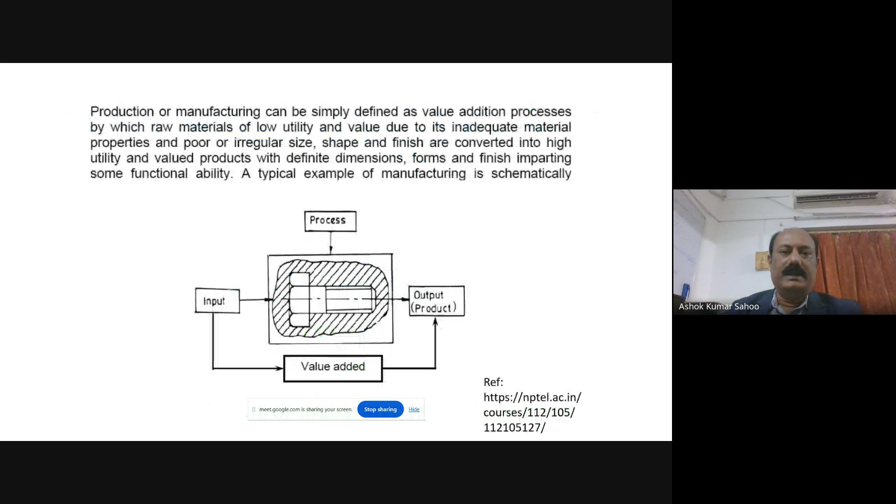So let me go through the details. As you know, manufacturing is simply defined as a value addition process, a conversion of a raw material of improper size and shape into a high utility and high value product. That means it adds value to the manufacturing process. In general, manufacturing is a value addition process where the material undergoes several manufacturing process cycles, starting with the raw material.

It has to be preformed first, through different manufacturing processes like casting, forging, rolling, extrusion, etc., to get the near net shape product, which is called preforming. As you know, the preformed part does not give the required dimensional accuracy or surface quality, and as such does not serve any purpose for engineering applications.

That's why it needs to be finished, and this semi-finishing operation is normally done by the process called machining. And if you want to enhance properties of the work material like hardness, wear resistance, corrosion resistance, etc., it needs to be heat treated.

Then after heat treatment, the material again needs to be finished by machining. After that, it undergoes a super finishing process by lapping and honing. So it has a long manufacturing cycle and costly set of equipment, and inspection has to be carried out at each and every stage. So machining is an essential and common manufacturing process for semi-finishing and finishing the preformed part.

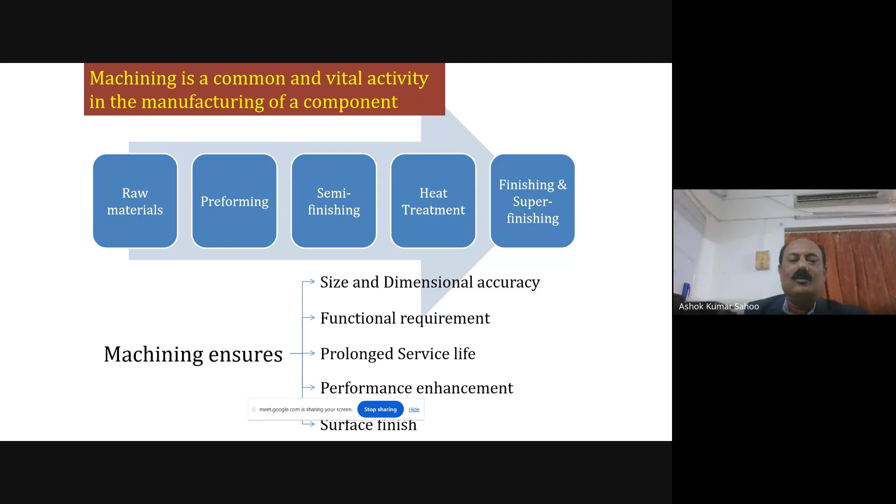What does it ensure? It gives the required size and dimensional accuracy, satisfies function, prolongs service life, improves performance, and ensures surface quality. As such, the preformed parts need to be finished by the process called machining to get a high quality, high utility, and high valued product.

Machining is an essential and common engineering process of semi-finishing and finishing the preformed blank to desired shape and size with good surface quality, by removing the extra material in the form of chips with the help of a cutting tool that moves past the workpiece in a machine tool environment.

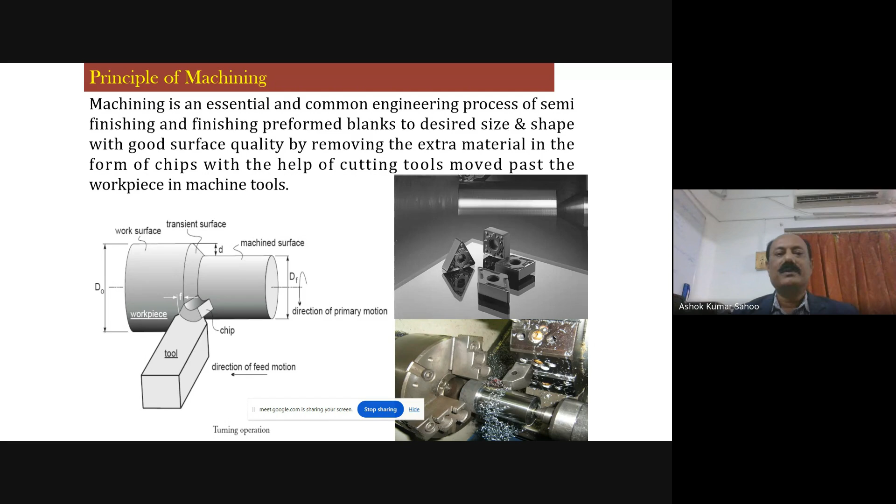It is performed with several cutting tools: a single point cutting tool, a double point cutting tool like a drill bit, or a multi-point cutting tool like milling cutters. Geometrically, if it is a single point cutting tool, the mechanism of chip formation, particularly at the tool-tip point, is more or less the same whether it is single point, double point, or multi-point.

The cutting tool plays a very vital role in machining and machinability studies for any work-tool combination pair. So we have to discuss the salient features of the different cutting tools especially used in manufacturing.

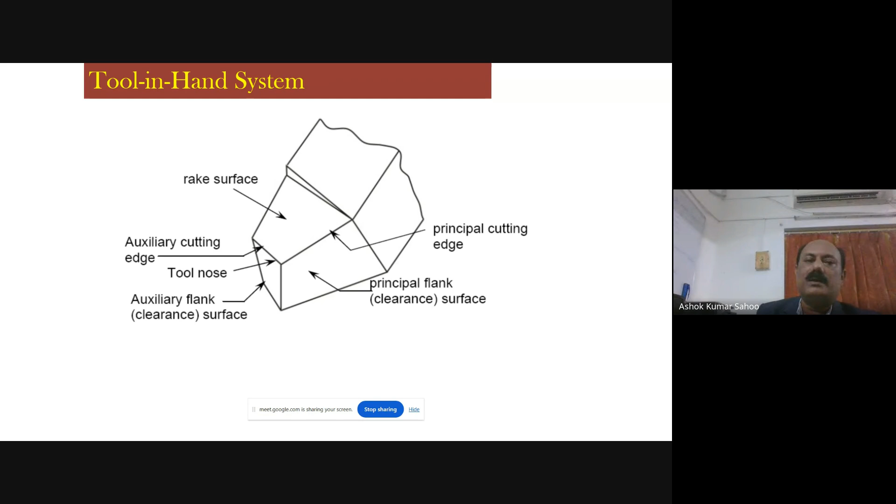Whether it is a positive rake tool or a negative rake tool, the tool is designated in different systems of reference. One is the tool-in-hand system, which gives only the salient features of the cutting tool like rake angle, clearance angle, principal cutting edge angle, auxiliary cutting edge angle, and nose radius.

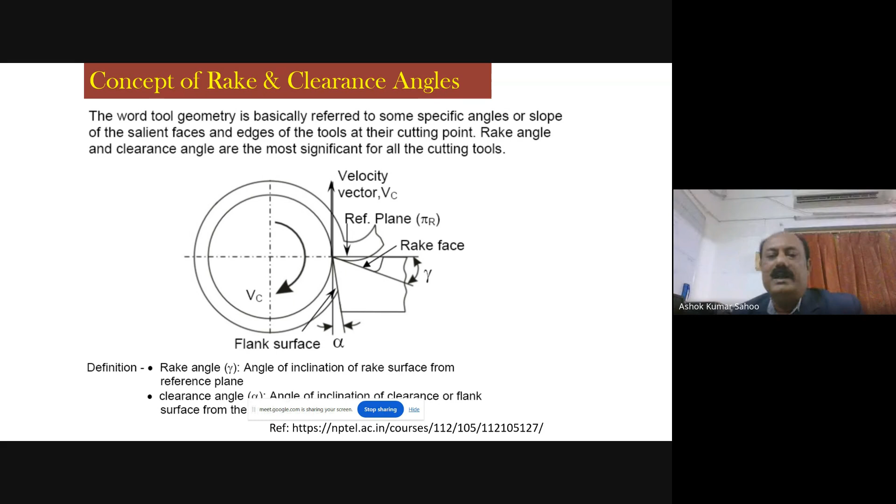The two most important angles that play a vital role in machining are the rake angle and the clearance angle. The rake angle is essentially provided to allow the chip to flow in a convenient direction, and the clearance angle is provided to avoid rubbing between the work-tool interfaces.

There are several geometries: positive rake tool, negative rake tool, or zero rake tool geometry. The clearance angle is essentially provided to avoid rubbing.

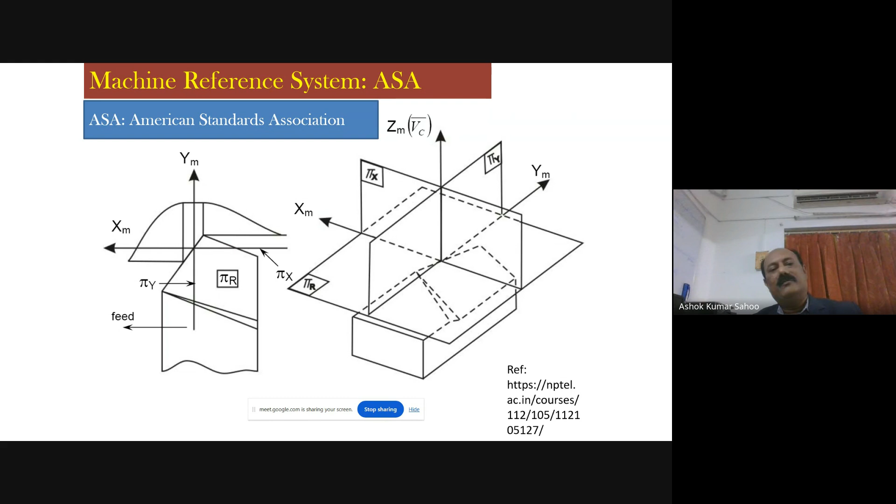The tool is designated in different systems like the American Standards Association (ASA) system, also called the machine reference system or XYZ reference system, where you get different angles in different views: the machine longitudinal view, the machine transverse plane view, and the reference plane.

There are three planes: reference plane, longitudinal plane, and transverse plane, designated by the pi-r, pi-x, and pi-y planes, and the x-m, y-m, z-m axes.

There are 7 angles associated with the different planes: gamma-y, gamma-x, alpha-y, alpha-x, phi, and so on. These are the tool nomenclature designated in the ASA system.

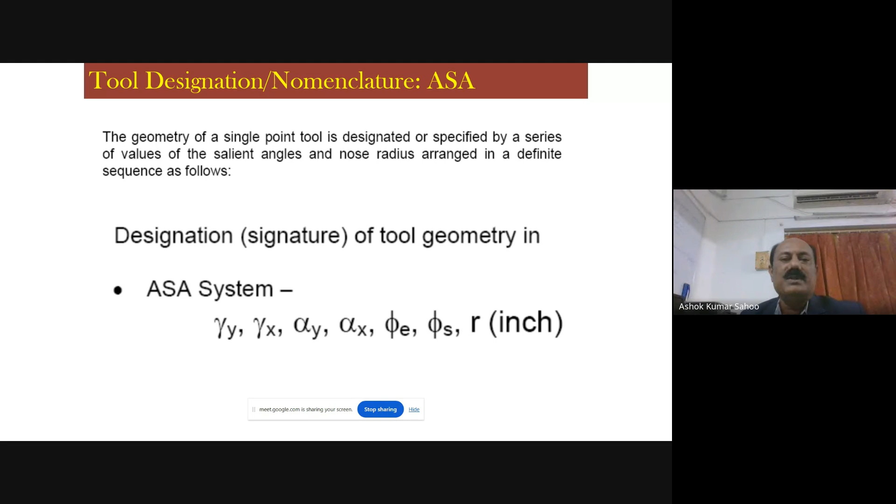Similarly, the tool is also expressed in the ORS, orthogonal rake system, in 3 different planes. One is the reference plane, then the orthogonal plane, then the principal cutting plane, which is along the direction of the principal cutting edge, and the orthogonal plane is perpendicular to both planes.

The tool geometry is designated in the orthogonal rake system where you get different angles in different planes. In the principal cutting plane, you get the inclination angle. In the orthogonal plane, you get the orthogonal rake angle and orthogonal clearance angle.

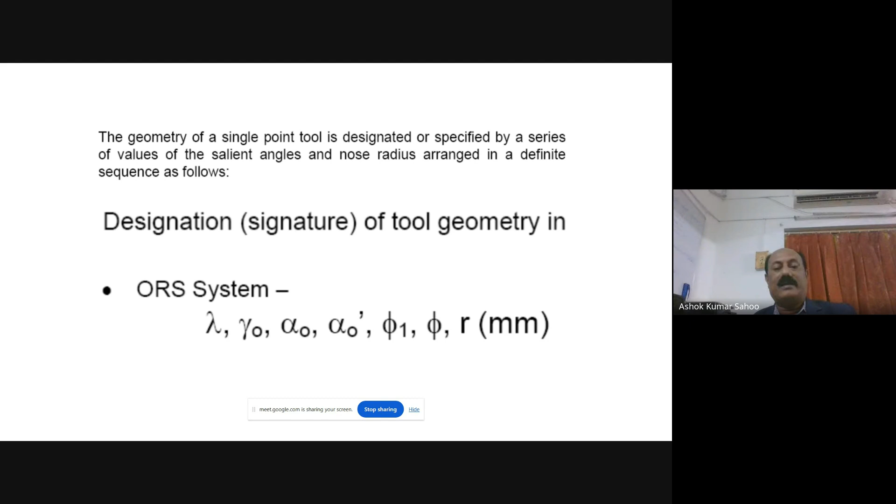If you cut the view of the auxiliary orthogonal plane, you get another clearance angle called the auxiliary orthogonal clearance angle. The tool is designated in the ORS system with angles lambda (inclination angle), gamma-O (orthogonal rake angle), orthogonal clearance angle, and auxiliary orthogonal clearance angle, along with auxiliary cutting edge angle, principal cutting edge angle, and nose radius expressed in mm.

Similarly, the tool is also expressed in the NRS system, normal reference system. Again, 7 angles are associated with it: lambda, gamma-n, alpha-n prime, and so on. These are associated with the normal plane, which is the plane normal to the principal cutting edge, different from the orthogonal plane.

This is the geometry and mechanism of chip formation. We know the cutting tool is subjected to compression first at the tool tip point. During compression, shear stress develops, and whenever the magnitude of shear stress exceeds the strength of the work material, deformation takes place and it flows along as chips.

The chip formation starts as yielding takes place at the chip-tool interface, called the shear zone or primary deformation zone, where the work is converted into heat, and a tremendous amount of heat is generated at the primary deformation zone.

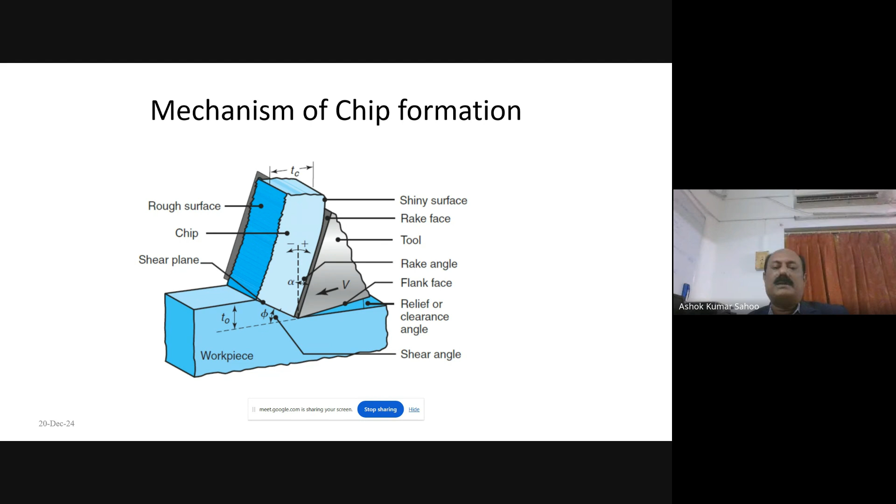When the chip flows over the rake surface, due to friction at the rubbing chip-tool interface, there is another secondary deformation zone where heat is generated. So total heat generation at the tool tip point occurs in the primary deformation zone, secondary deformation zone, and tertiary deformation zone. This needs to be controlled by applying proper cooling and lubrication techniques.

This is done under different sustainable machining environments like dry machining, minimum quantity lubrication machining, nano-assisted machining, or flood machining. You have to control the temperature at the tool tip point by applying various coolants.

Machining and machinability refer to the ease of machining, and this ease of machining is usually assessed and judged by the magnitude of the cutting force, the tool life, the surface finish, the magnitude of cutting temperature, and the nature and form of the chip being formed.

Machinability is considerably high when the cutting force, temperature, surface roughness, and tool wear are very low, tool life is high, and the chips are short and continuous, providing short chip-tool contact length and less friction. If we observe this phenomenon, we can say the machinability is good.

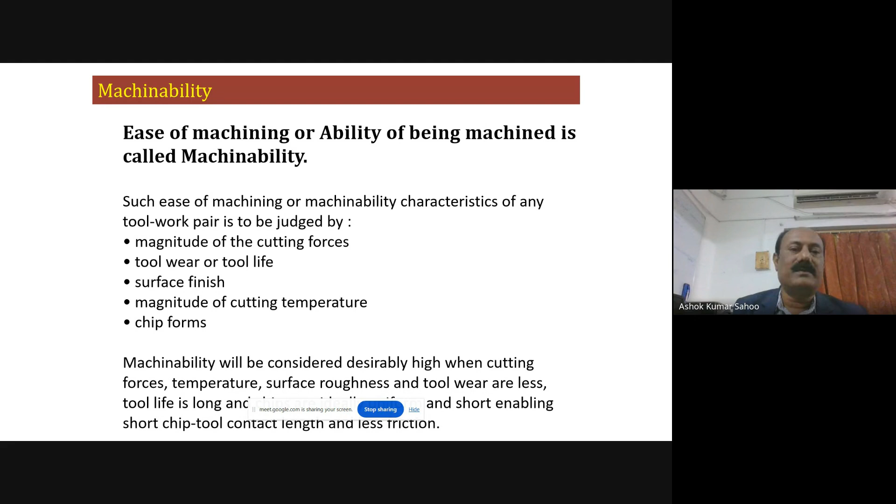The cutting tool is usually failed by catastrophic failure, through different modes: mechanical breakage due to excessive force, stress and vibration, or plastic deformation due to stress and cutting temperature. If these two failures are avoided, due to advanced cutting tool materials, another form of wear occurs which is inevitable and cannot be controlled.

There are many forms and types of wear that occur at the cutting tool tip point during machining. One is flank wear, and another is crater wear. As observed, these are the patterns of wear seen at the flank tool rubbing interface zone, and also where the chip flows over the rake surface.

There is crater wear formation due to adhesion and diffusion mechanisms, and also very small contact between the auxiliary cutting edge point and the work surface, resulting in auxiliary flank wear.

But out of all these wear phenomena, the most important are flank wear and crater wear, which are formed due to adhesion, abrasion, and diffusion mechanisms in particular.

As shown in the diagram during the machining operation, wear mechanisms occur due to abrasion, chipping, adhesion, crater wear, and flank wear VB. The recommended limit of flank wear is 0 to 0.3 mm as per ISO standard for acceptable limit, and for roughing operations it may go up to 0.6 mm.

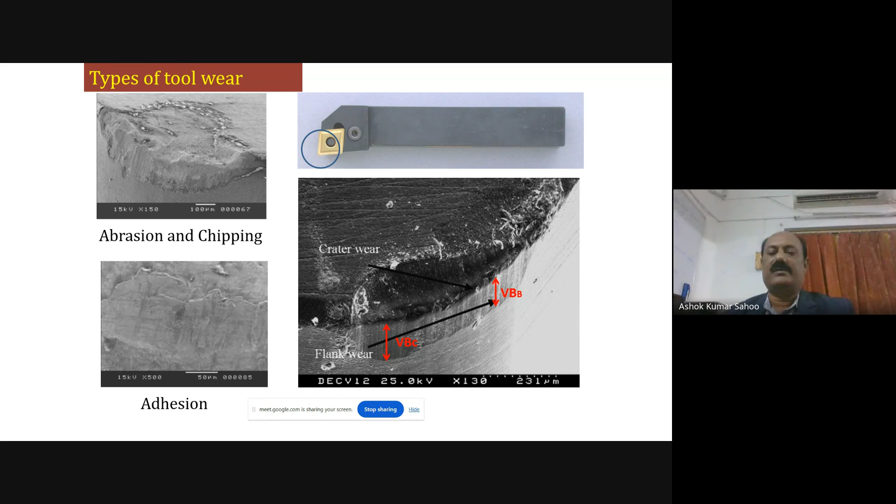In order to have good properties of the cutting tool material to reduce wear, the cutting tool should have high strength, hot strength, and abrasion resistance, high hardness to resist abrasive wear, high hot hardness property, high fatigue resistance, and resistance to adhesion and abrasion. It should have low thermal expansion coefficient, with thermal conductivity high at the core and low at the surface, and chemical stability. These are some essential properties the cutting tool media should possess to avoid tool wear.

Nowadays, a commonly used cutting tool material in machining operations is the carbide cutting tool material. Coated carbide tools are extensively used in machining difficult-to-cut materials, or in hard machining. These coatings are usually applied at the substrate of the carbide interface.

These hard thin layer coatings are nothing but titanium nitride, titanium carbide, titanium carbonitride, and aluminum oxide. These coatings are provided in the range of 2 to 15 microns of thickness to the cutting tool, by means of physical vapor deposition and chemical vapor deposition techniques.

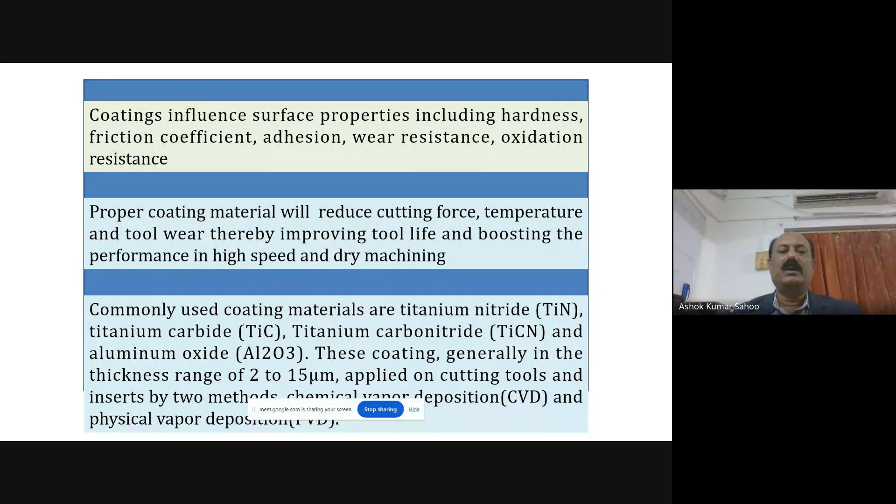I'm showing one case study comparing the performance of uncoated and coated carbide inserts during machining of the hard material D2 steel, which is used in the machining operation.

Let us see the actual machining and machinability observations and the cutting conditions used. The workpiece used is D2 steel with a hardness of 22 HRC. Cutting speed is comparatively high at 200 meters per minute, feed rate is 0.21 mm per revolution, and depth of cut is 0.4 mm. The cutting operation is conducted under dry environment with two inserts: uncoated carbide and coated carbide inserts.

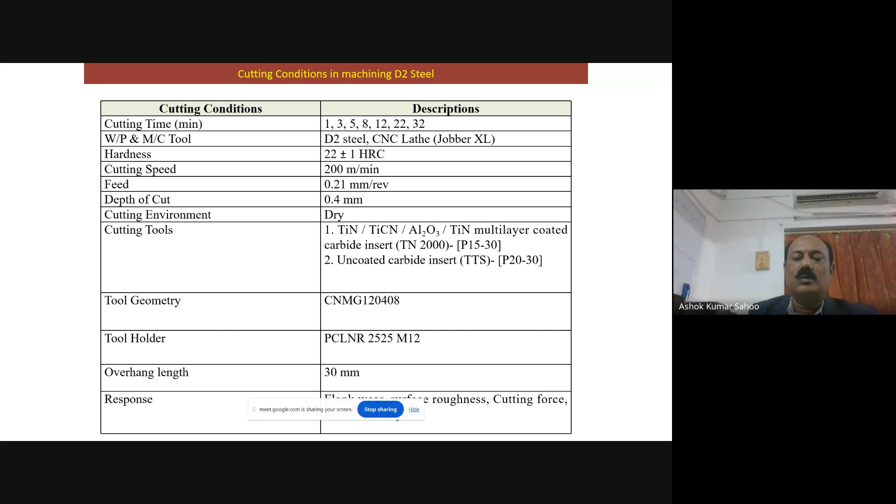As we have observed, during 5 minutes and 3 minutes of time, the uncoated carbide fails and rapid tool failure occurs during 5 minutes of time, whereas the coated carbide insert undergoes up to 32 minutes of operation before attaining the required flank wear limit of 0.3 mm, or to achieve the higher tool life.

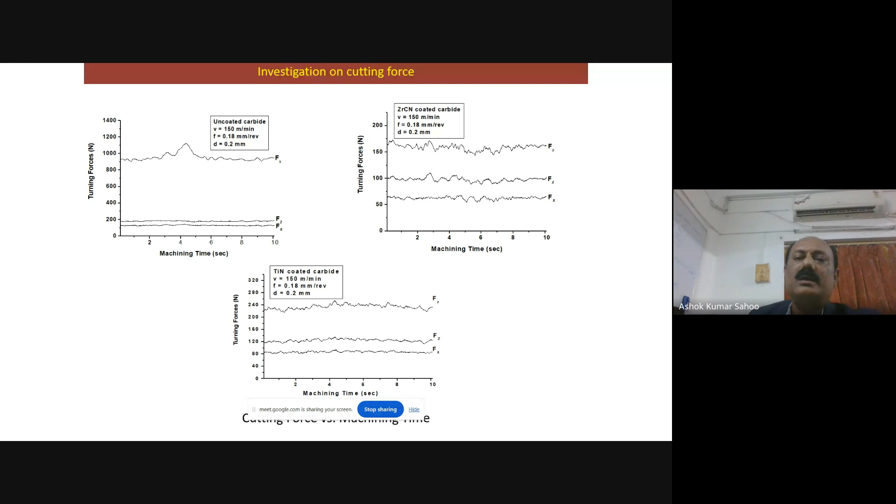That's why the life of the cutting tool for the coated carbide insert is usually higher as compared to the uncoated carbide insert. So in order to compare the performance of the two inserts, economic analysis has also been calculated.

For the comparative economic analysis, as per Gilbert's approach, there are different cost components associated with the economic analysis: the machining cost, the tool changing cost, and the tooling cost. The addition of the machining cost, tool changing cost, and tooling cost is called the total machining cost per part.

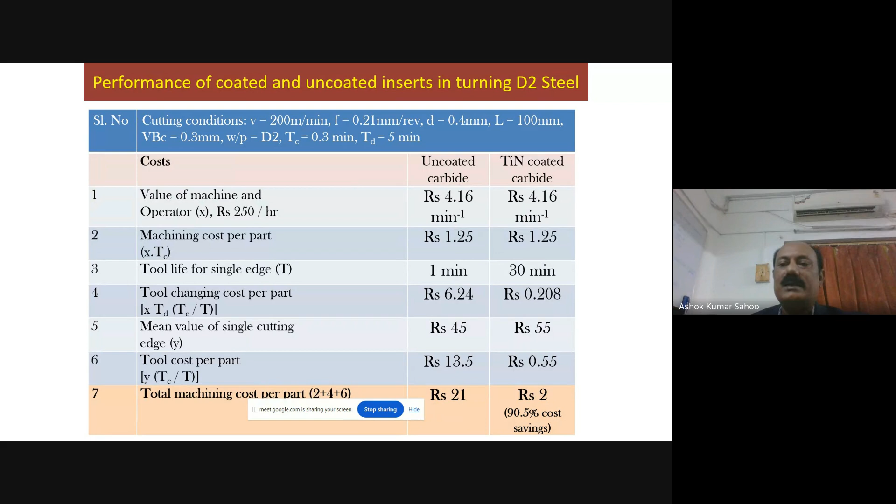As observed, the total machining cost per part for the titanium nitride coated carbide insert is only ₹2, as compared to the uncoated carbide insert, which induces 90.5% cost saving by utilizing the coated carbide insert in the machining of the hardened die steel operation.

So in conclusion of this case study, we observed that the uncoated carbide insert induces severe chipping, higher cutting forces, quick dulling of the cutting edges, and very low tool life, as compared to the titanium nitride coated carbide insert, which induces higher surface quality, less cutting force, and steady flank wear progression.

To achieve the tool life, so that tool life is higher, and 90% cost saving - this is the benefit of utilizing the coated carbide insert, so as to get higher machinability and higher tool life and less cost during machining of the hardened steel.

So this paper has been published in the journal Measurement, Elsevier.

Let us come to another case study of hard machining. Nowadays, it is an emerging technology in the machining industries, or manufacturing industry particularly, because grinding was the preferred choice for machining hardened components earlier. But due to the advent of super hard cutting tool material and also rigid machine tools, the hard machining operation is successfully replacing the traditional grinding operation.

As we know, in the traditional grinding operation, it has a longer manufacturing process cycle, costly support equipment, and also costly grinding wheel cost. Cutting fluids are added during the grinding operation, so it is not an environmentally friendly operation.

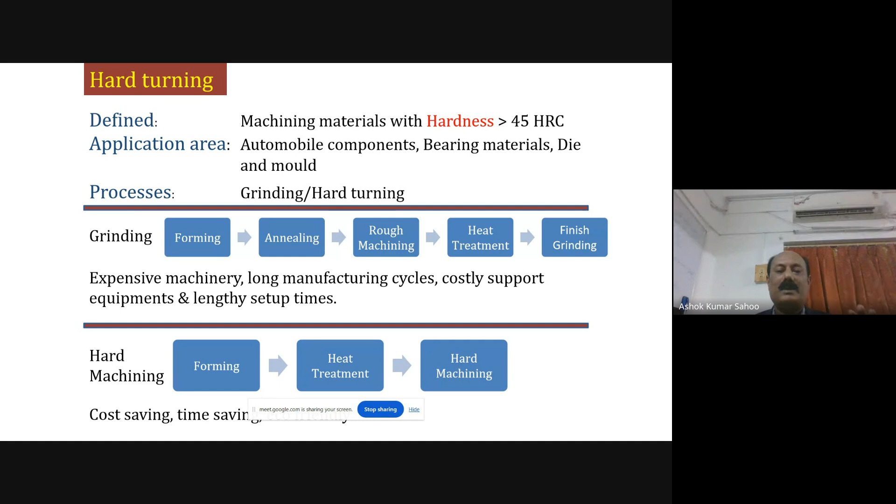But due to the application of hard machining, it reduces the manufacturing cycle, reduces the cost, and is operated under a dry environment. So it is cost saving, time saving, and environmentally benign manufacturing.

Nowadays, hard machining is successfully replacing the grinding operation in many situations for engineering applications, particularly in automobile components, bearing material, and die and mold industries. That's why hard turning is now emerging as a research topic in manufacturing fields.

It has a lot of advantages: substantial reduction of manufacturing cost by reducing the cycle of manufacturing, decreases machining time, improves surface quality, and eliminates the coolant operation, which is the most important part extensively utilized in grinding operation.

Hard machining eliminates the long manufacturing cycle, and preferably the cutting tool material used is cubic boron nitride CBN or ceramic tools, which are popularly used. But nowadays the manufacturing cost has been reduced for hard machining by utilizing coated carbide cutting inserts, because their cost is comparatively less than CBN and ceramic inserts. However, we have to analyze the machinability aspects of coated carbide inserts to ensure suitability in hard machining.

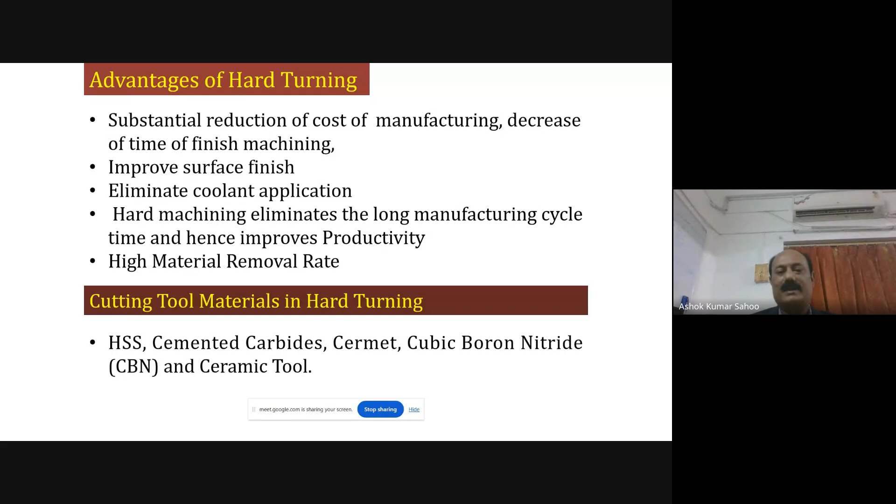There are a lot of industrial applications in hard turning operation, such as transmission shafts, axles, ball roller bearings, crank pins, and engine components.

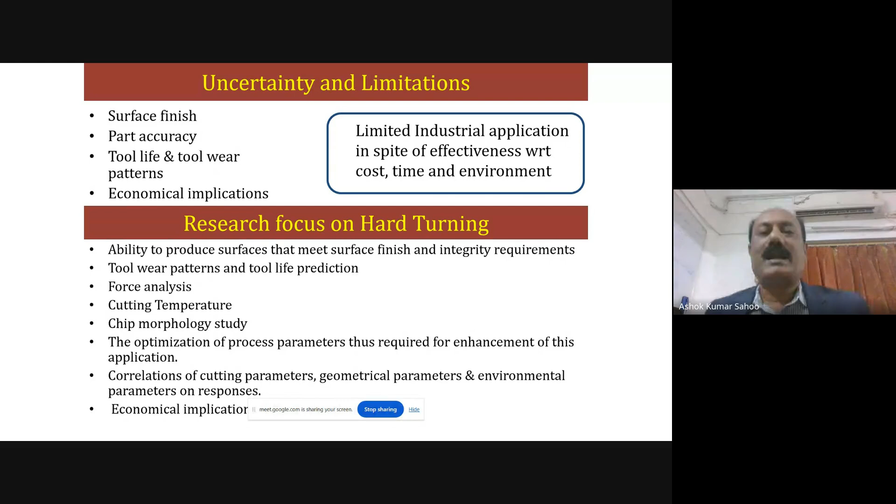Some comparative features between hard machining and grinding show qualitative comparisons. But though hard machining has a lot of advantages compared to grinding, there is always an uncertainty from an industrial application point of view, despite its effectiveness with respect to cost, time, and environment.

So that's why, to get the surface finish comparable to the grinding operation, questions remain about part or dimensional accuracy, what will be the tool life and tool wear in hard machining particularly using low cost coated carbide inserts, and what will be the economical implications. These are certain uncertainties always present in hard machining operation.

That's why research is needed, focused particularly on hard machining or smart machining, on surface finish and integrity, tool wear pattern and tool life, force analysis, cutting temperature, and chip analysis.

Optimization of the process parameters is highly essential for the effectiveness of hard machining. We have to correlate different mathematical and prediction models to be developed, along with economical implications. So there are a lot of research gaps in hard machining.

That's why it is a burning topic now in manufacturing research, particularly in sustainable manufacturing and smart manufacturing, so as to get the benefit of it. The most popular coated carbide inserts are less investigated in hard machining, which is one of the knowledge or research gaps we have observed.

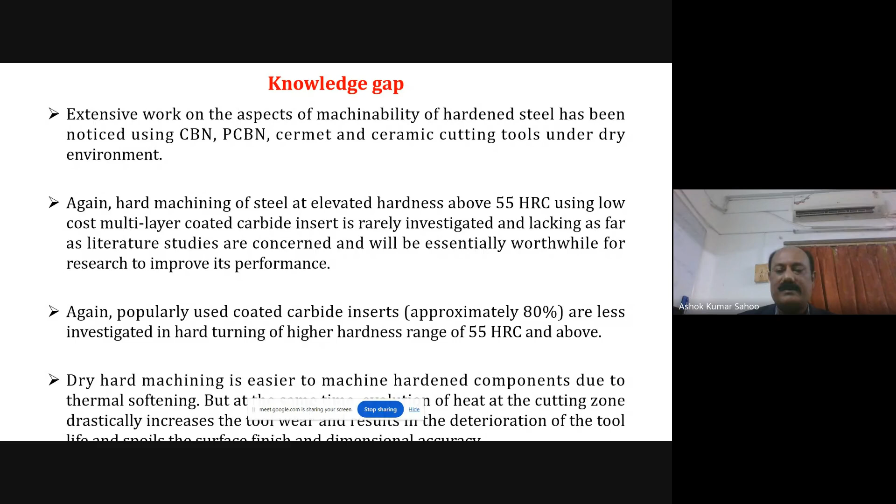Dry machining is suitable for machining hardened components due to thermal softening, because the force is reduced. But at the same time, it increases tool wear because of the generation of a lot of temperature, due to which tool wear is maximum and higher, which drastically reduces the tool life and also the surface quality. These are the challenges.

That's why a detailed machinability study on surface finish, surface integrity, tool wear, and tool life needs to be carried out using coated carbide inserts, which are less expensive cutting tools, and it should be implemented in hard machining for its effectiveness.

The majority of hard machining operations are undergone in a dry environment, and few studies were undertaken on the application of coolant. So there is agreement and disagreement on whether we will apply coolants in hard machining operation or not. This is also a burning topic, open to the researcher's point of view.

Second thing, coolant is usually not suitable in hard machining operation, because if you apply coolants, a lot of temperature is generated. If you apply coolants in flood machining operation, it induces thermal stress, and it may cause catastrophic failure of the cutting tool. That's why there is frequent failure of the cutting tool during the application of coolant due to thermal stress and catastrophic failure.

So that's why whether it will be applied under the flood machining environment condition or under the dry machining environment condition, there is agreement and disagreement. So we should always focus on in between, where there is both dry and flood machining environments.

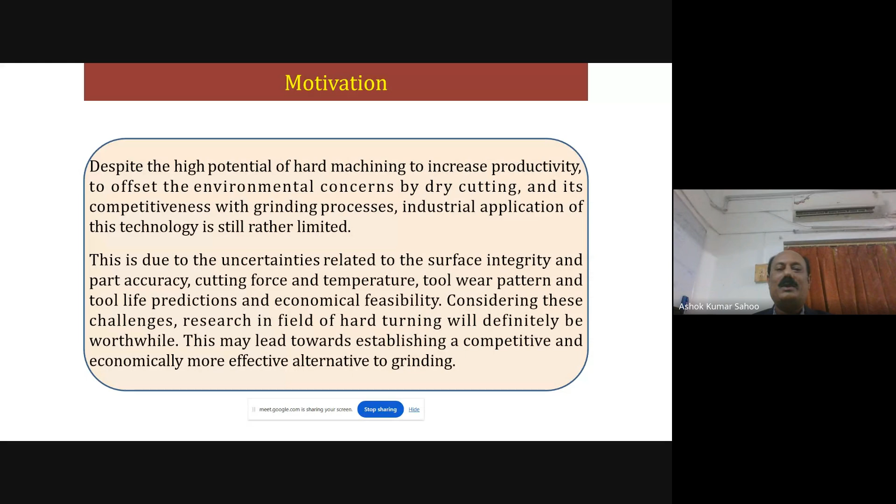Another important aspect in hard machining is that the thrust force component is higher compared to the cutting force and feed force. In particular, because the radial component force is higher, it deteriorates the surface quality, deteriorates the dimensional deviation, and induces vibration to the cutting tool, which needs to be monitored and controlled. That's why tool condition monitoring and surface condition monitoring study is highly essential for machining of hardened steel, in hard machining in particular.

Vibration signals have strong correlation with surface roughness and tool wear. That's why tool condition monitoring study will be definitely worthwhile and beneficial for the application of hard machining. So this is also a challenge.

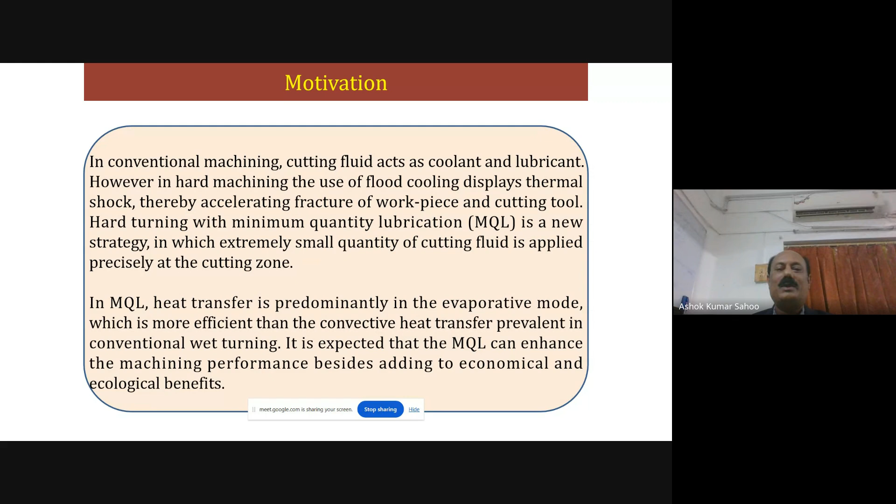In MQL, heat transfer is predominantly in the evaporative mode, which is more efficient than the convective heat transfer prevalent in flood cooling. So it is expected that minimum quantity lubrication is a new strategy in which extremely small quantity of cutting fluid is applied to the cutting zone, which may enhance machining performance besides adding economical and ecological benefits. So this needs to be investigated in detail.

Appropriate selection of machining parameters, tool geometry, grade of cutting tool material, and coatings—particularly in carbide cutting tool inserts—are essential for suitability in dry, hard machining and smart machining operations. This brings the novelty of the investigation of the coated carbide insert in hard machining under a dry environment.

This is a challenge in dry hard machining, because there is evolution of the cutting tool wear due to high cutting temperature. So proper and appropriate selection of the machining parameter, environmental parameter, and geometrical parameter are highly essential for it.

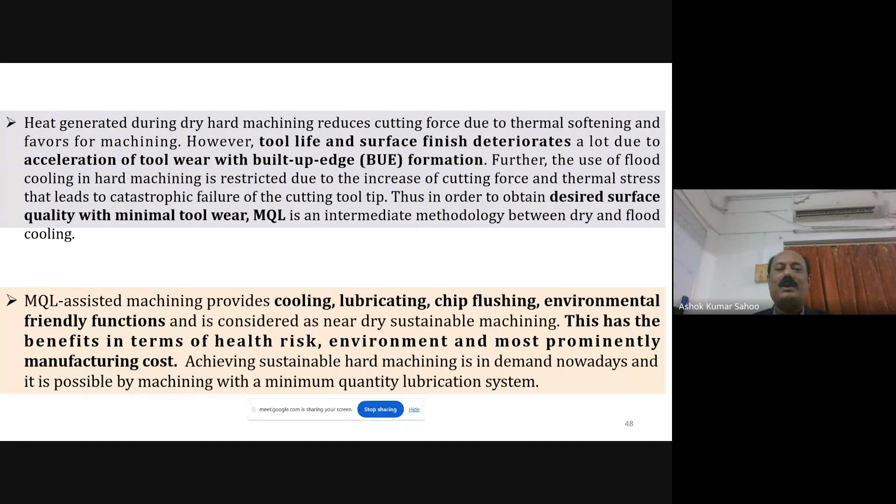Heat generation during hard machining reduces the cutting force due to thermal softening and favors machining. However, tool life and surface finish deteriorate due to acceleration of tool wear and built-up edge formation. Minimum quantity lubrication plays a very important role in this aspect. The study related to machinability, modeling, optimization, and sustainability assessment in hard machining is also lacking under dry and MQL environments, and needs to be studied in detail.

Application of nanofluids in hard machining through MQL is also observed to be significant and emerging nowadays as a recent technology for cooling and lubrication, called sustainable machining. Nanofluids are especially applied due to excellent properties like thermal conductivity and viscosity. As far as hard machining is concerned, the application of nanofluid-assisted minimum quantity lubrication technique is very, very limited and thus needs investigation.

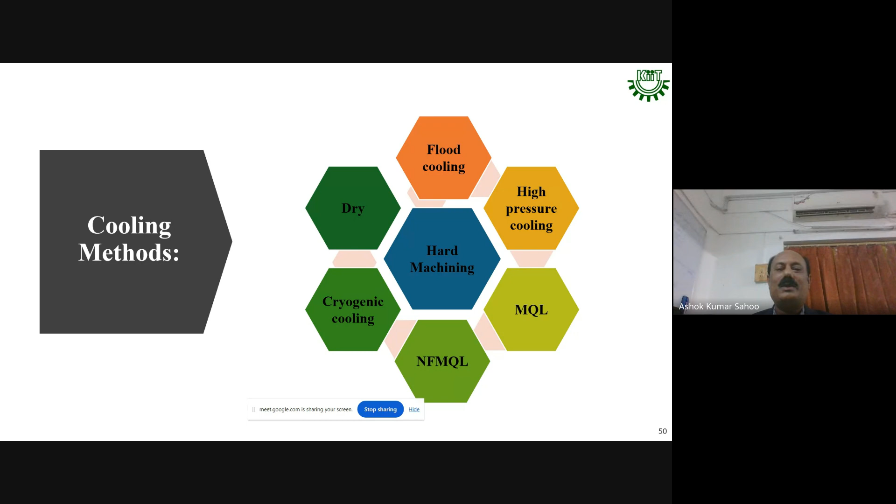So that's why I have shown here the different cooling and lubrication techniques usually adopted in hard machining for its effectiveness: dry, flood machining, high pressure cooling, minimum quantity lubrication, nanofluid minimum quantity lubrication techniques, and cryogenic cooling. Sustainability aspects need to be measured for economical benefit, environmental benefit, and societal benefit. So we observe three important pillars in case of hard machining: economical aspect, social aspect, and environmental aspect.

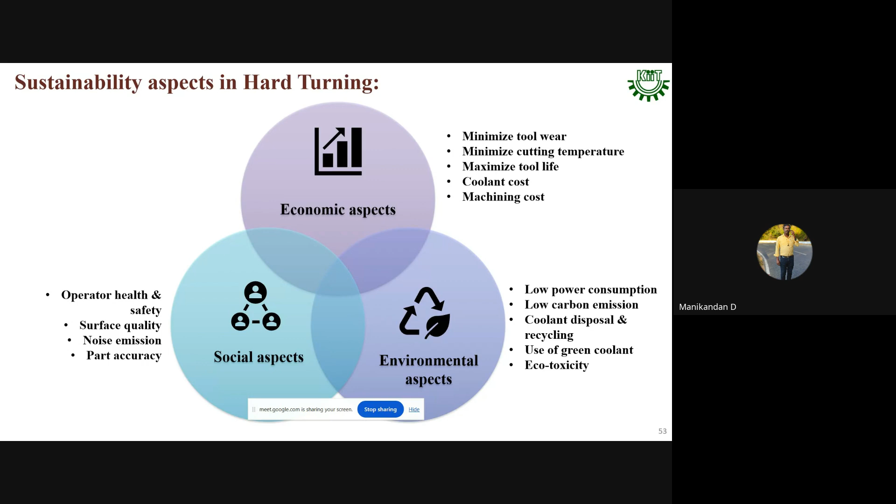Also, carbon emission needs to be reduced for sustainability, and noise emission needs to be reduced. A lot of economic analysis needs to be carried out for effectiveness of hard machining due to nanofluid application, because a lot of costs are involved: nanofluid cost, MQL setup cost, tool life, tool replacement cost, cutting tool cost, operator cost, and machine cost. So you have to optimize everything.

Economical aspects, societal aspects, and environmental aspects need to be studied in detail for sustainable machining, and a lot of costs are involved.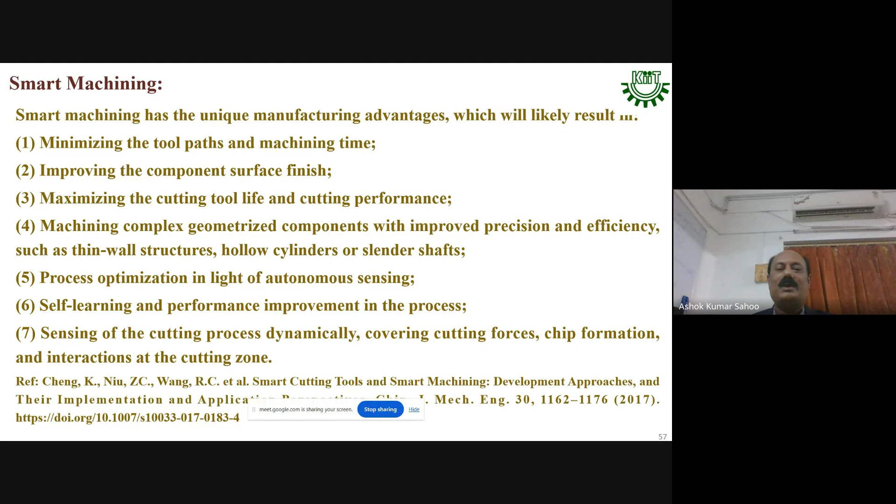Let us have another case study about smart machining that I have observed: improving the component surface finish, the cutting tool life and cutting performance, and also minimizing the machining time and reducing the machining cost. So to achieve this smart machining operation, let us have one case study of the machining of hardened D2 steel, heat treated up to 55 HRC.

The machining of this hardness workpiece material is operated under dry environment, dual nozzle minimum quantity lubrication environment - meaning double nozzles are applied, one ejected at the flank wear rubbing zone and another at the crater wear surfaces at the chip tool interface, and another at the flank tool interface - and also the nanofluid minimum quantity lubrication environment with ZrO2 (zirconium oxide) nanofluid and graphene oxide nanofluid environment. So 4 cutting environments are utilized for sustainability.

This is the experimental setup, with cutting speed 80 meters per minute, feed rate 0.05, depth of cut 0.1, and 2 nanoparticles used: ZrO2 (zirconium oxide) and graphene oxide.

Machining performances are measured here. Comparative machining performances are observed for flank wear, dimensional deviation, power consumption, roughness, and cutting temperature. We also measured carbon emission and noise emission, as well as chip characterization, done using measuring instruments including a microscope, surface roughness tester, IR camera, noise meter, scanning electron microscope, and more. So this is more or less the experimental techniques and setup.

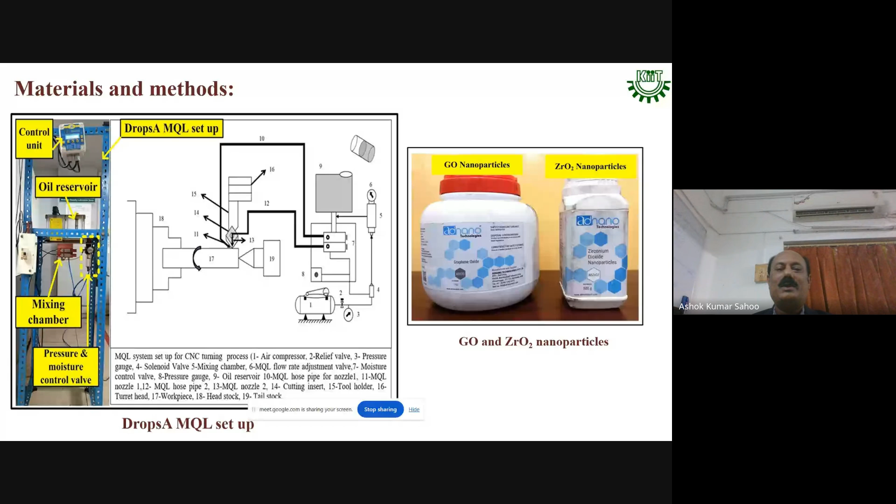Minimum quantity lubrication, where pressurized air and oil are forced through a specially designed nozzle, particularly at the 2 rubbing zones - the chip tool interface zone and the work tool interface zone - placed at 90 degrees to each other, utilizing the 2 nanoparticles graphene oxide and zirconium dioxide. This is the setup of the minimum quantity lubrication application in the CNC lathe for smart machining operation with my setup.

This is the preparation of the nanofluids mixed with mineral oil LTR 30, followed by pre-dispersing, magnetic stirring, and ultrasonication. Then the nanofluids are prepared and characterized. Characterization of nanoparticles has been conducted through sediment test, pH test, spectroscopy, rheology, thermal conductivity, and tribological test, and also the toxicity property of the nanofluid has been tested.

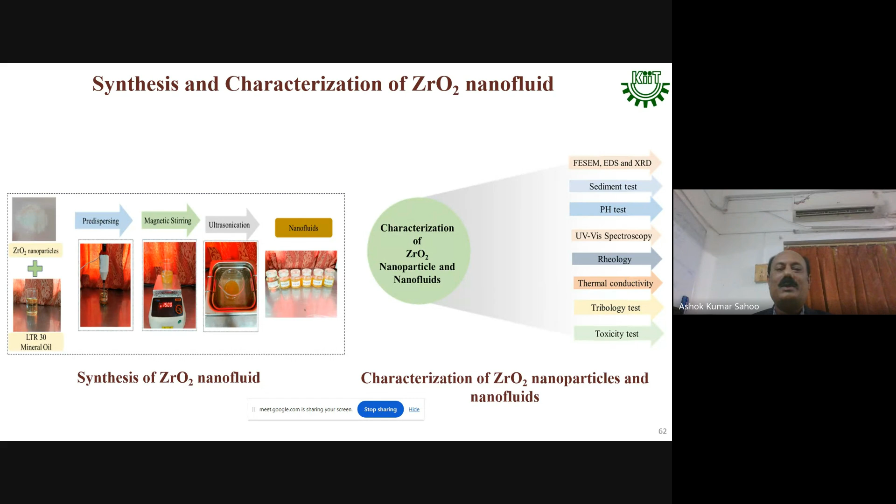Particularly, 2 important properties were conducted here: thermal conductivity, viscosity, and toxicity property - whether it is toxic to the environment or not. Similarly, for graphene oxide nanoparticle, we prepared the graphene oxide nanofluids, and a lot of characterization was carried out.

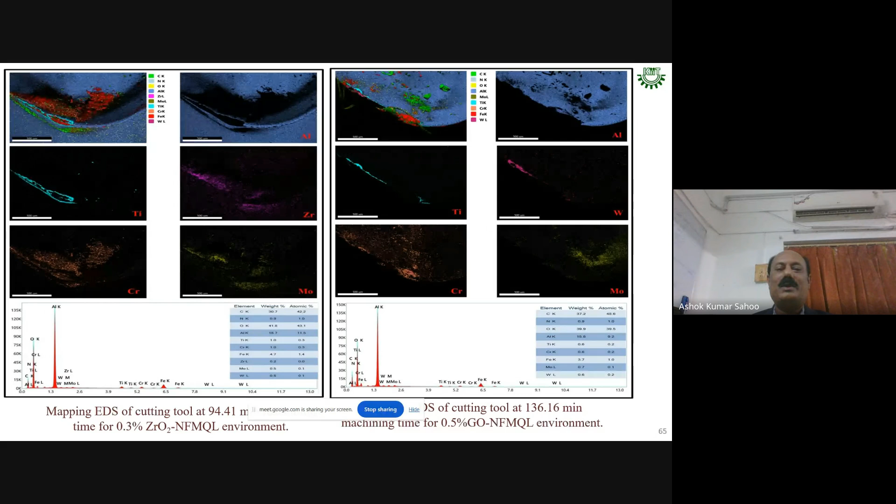These are the EDS images of the cutting insert after machining with respect to successive machining time at the end of tool life, because the tool life for the graphene oxide nanofluid minimum quantity lubrication environment is found to be 136 minutes as compared to 94 minutes for the ZrO2 environment.

Similarly, sustainability assessment has also been carried out using the Pugh matrix approach, where the total score has been calculated considering different sustainable assessment parameters like environmental impact, operator safety, coolant cost, coolant recycling and disposal cost, surface roughness, flank wear, power consumption, temperature, noise level, and part cleaning.

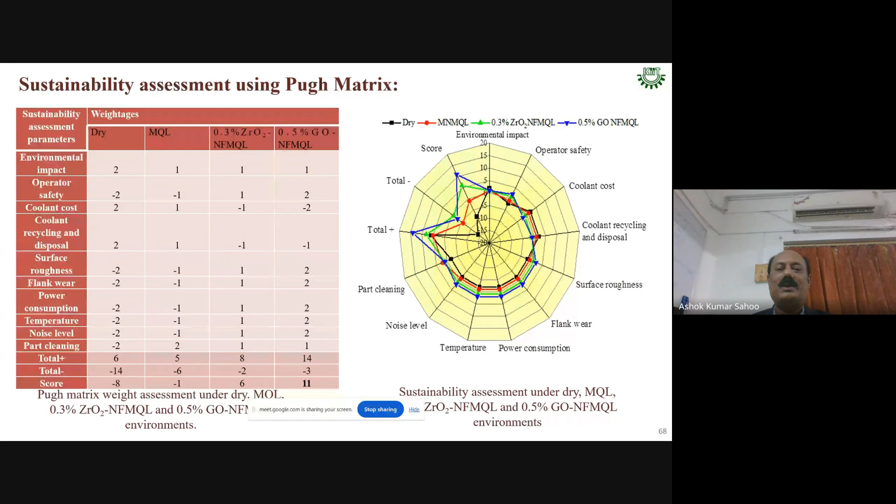So these are the sustainability assessment parameters we considered for calculation of the sustainability assessment, considering environmental aspect, technological aspect, and societal aspect. It's a qualitative approach where we get the maximum score for graphene oxide nanofluid environment, so it is more sustainable as compared to the others.

In conclusion, it is obtained that application of 0.5% weight graphene oxide nanofluid MQL environment provides better sustainability as far as socio-technological, economical, and environmental benefits are concerned compared to other environments, from a matrix sustainability assessment approach, and it may be recommended to machining industries for green and sustainable manufacturing processes.

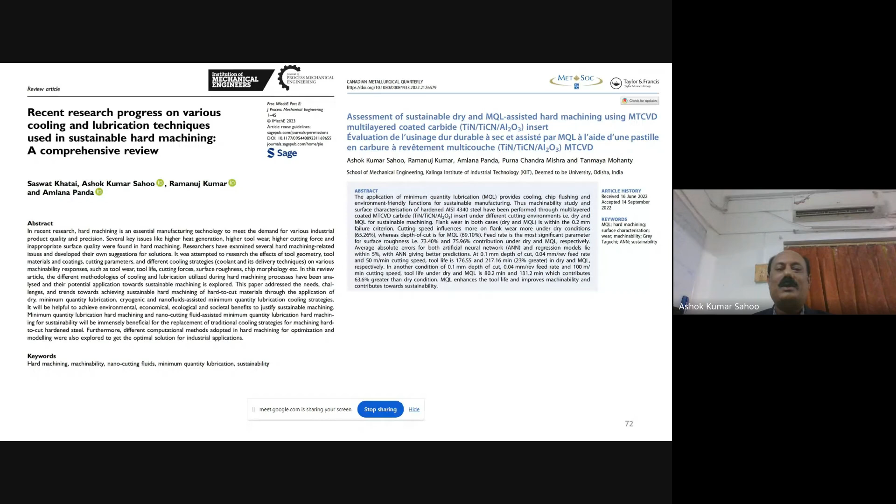So these findings are published in different SCI journals in Sustainability, Applied Sciences, and also the SAGE journal IMechE Part E, and also the Canadian Metallurgical Quarterly Journal in Taylor Francis. All are SCI journals for sustainable machining and lubricants, and it is also published in IMechE Part E.

So we have published a lot of hard machining research articles under various sustainable machining environments, under dry, MQL, and also the hybrid MQL environments, and nanofluid MQL environment also.

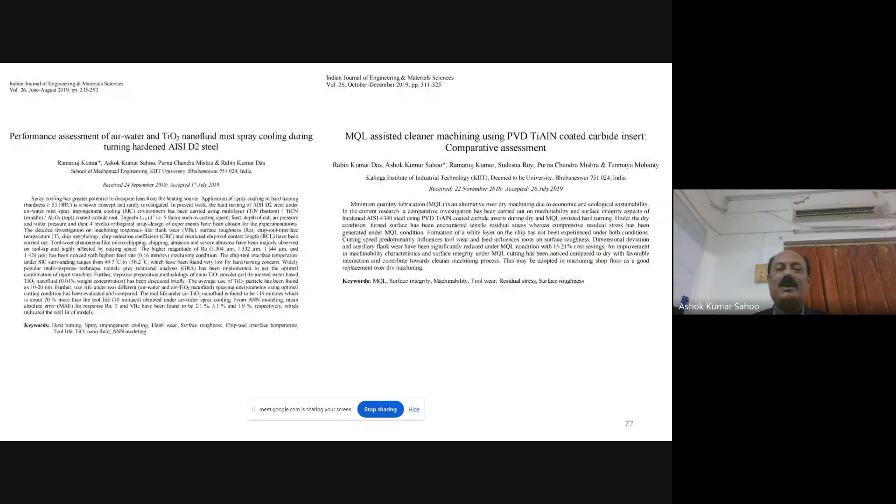Also, the paper has been published under Measurement on machinability study under various environmentally conscious spray impingement cooling assisted machining environments. This is the recent article published on application of nano graphene oxide mixed dielectric

in sustainable EDM of Nimonic alloy using copper and brass electrode. So this is the potential of application of the nanoparticle in dielectric or in the cutting fluid environment, whether it is a conventional machining or maybe a non-conventional machining environment.

So let us go to another case study, for additive manufacturing of titanium alloy. Why is this topic important? Because whenever we go for the machining of titanium alloy, it

induces lots of sparks and fires, and the temperature is maximum in case of machining of titanium alloy, though it has tremendous application in aerospace industries.

It is very, very difficult and hard to cut material because the thermal conductivity is very low, and it has high chemical reactivity and work hardening property also.

And whenever you machine titanium alloys, it induces built-up edge formation due to adhesion of chip particles at the chip-tool interface, which induces poor surface quality, dimensional accuracy, and thus in general the tool wear is higher, and finally the machinability is poor.

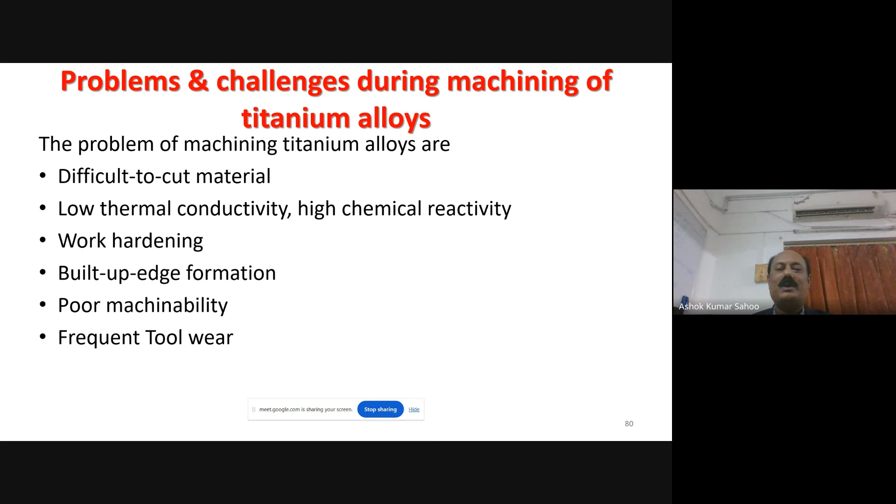So these are some challenges in machining of titanium alloy. To overcome it, the appropriate selection of the cutting tool material, cutting tool geometry, machining parameters, and appropriate selection of the cutting tool and coolants are especially essential for the effectiveness of industrial applications.

As you know, additive manufacturing is a smart manufacturing process of adding material layer by layer from three-dimensional modeling. The evolution of 3D printing started when the commercial 3D printer was introduced in the market in 2003.

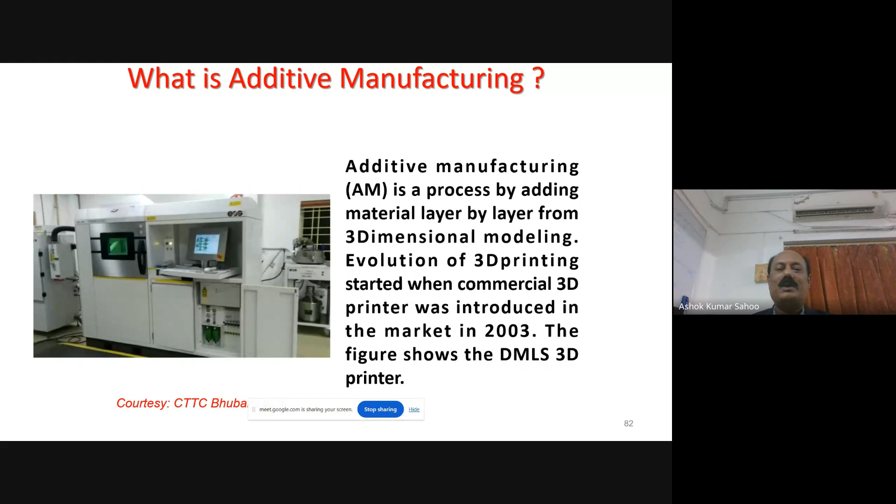And we know titanium alloys are widely used, particularly in aerospace, automotive, and biomedical industries, due to excellent properties such as superior strength-to-weight ratio and corrosion resistance.

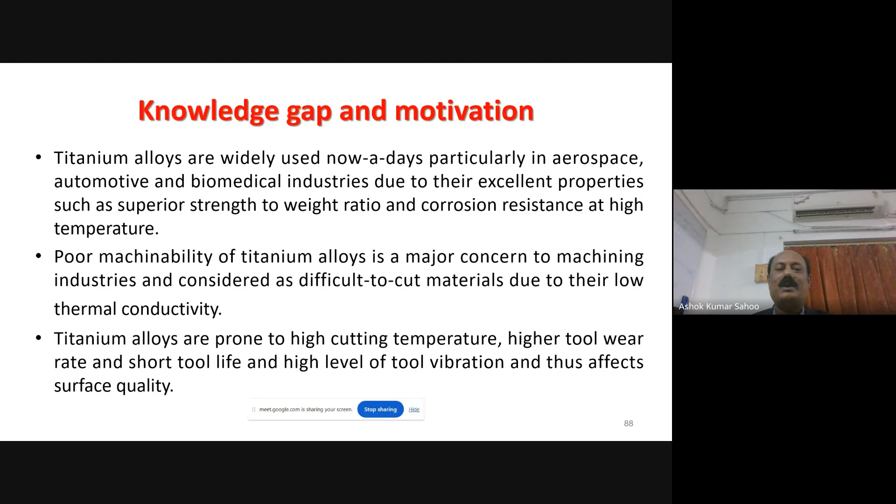Poor machinability of titanium alloy is a major concern. It is prone to high cutting temperature, high tool wear, built-up edge, and high level of tool vibration, which affects the surface quality.

To reduce cutting tool wear, chipping, and built-up edge, multi-layer coated carbide inserts are generally proposed. So coated carbide inserts play a very vital role in this. In addition, various methods are adopted for development of additive manufactured titanium alloy through direct metal laser sintering process.

As observed from the literature, additive manufactured titanium alloys have higher mechanical properties such as yield strength, ultimate tensile strength, and hardness compared to wrought alloys, due to difference in microstructure that negatively influences machinability. So there is a lack of ductility in additive manufactured titanium alloy compared to the wrought alloy.

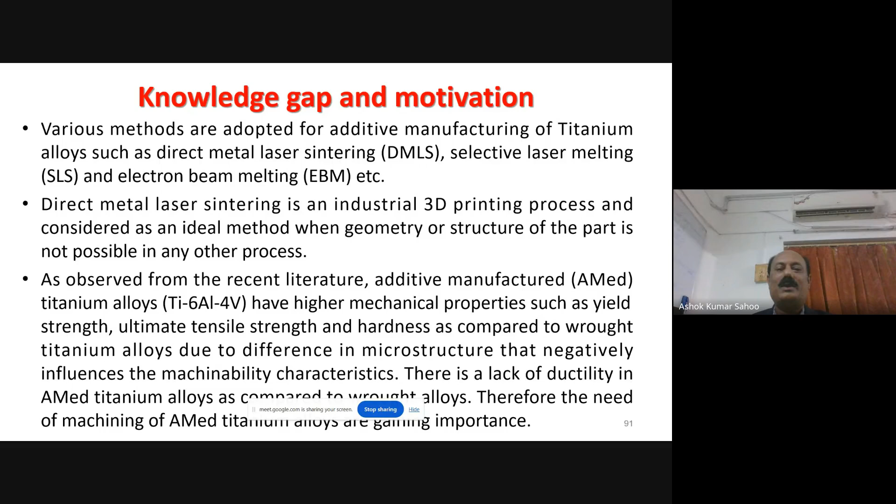Therefore, the need for machining of additive manufactured titanium alloys is gaining importance nowadays. The rapid heating and cooling of additive manufactured titanium alloys during the 3D printing process develops residual stress between the built part and object, and within the object itself, so it needs to be relieved by a stress-relieving heat treatment process.

The main limitation of additive manufactured parts is poor surface quality and shape accuracy, and the staircase effect, because of the high power laser beam used to melt and fuse layers of metallic powder together, and adhering of non-melted powder particles to the fabricated components.

This is a challenge. The poor surface roughness of additive manufactured parts depends on parametric settings such as powder size, scan speed, and layer height. So the process parameters need to be controlled during additive manufacturing.

Therefore, additive manufacturing processes are meant for producing near net shape components. Thus, optimization of the parameter settings in additive manufacturing may yield better surface quality. So this needs to be investigated.

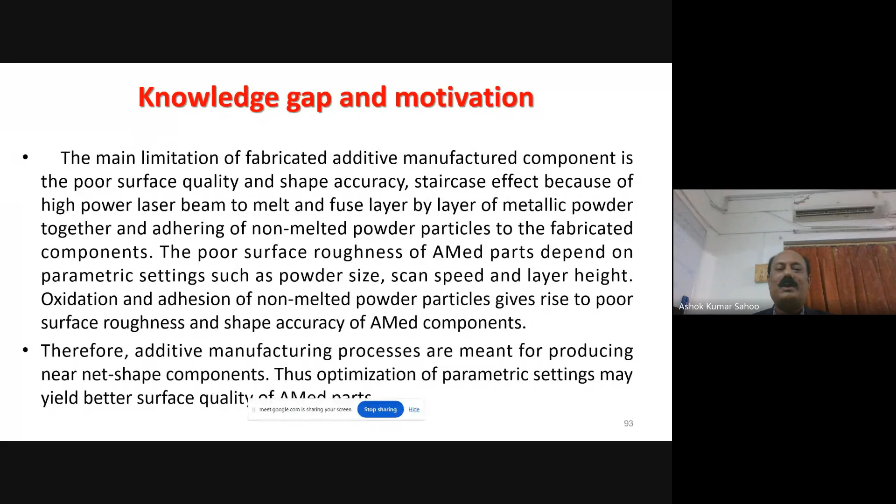Additive manufactured titanium alloys can be produced with higher strength, but the ductility and fatigue life are lower compared to wrought titanium, due to high tensile residual stress, surface roughness, and porosity. Fatigue life also increases with decrease of surface roughness.

Therefore, performance characteristics can be enhanced through additional heat treatment process for stress relieving, which has to be carried out. By doing so, additive manufactured parts become comparable with conventionally manufactured parts.

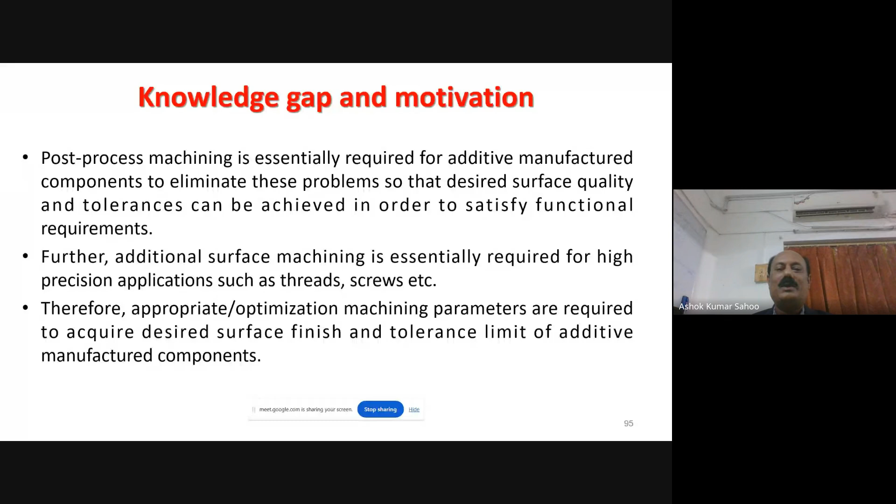So post-process machining is essential for additive manufactured components to eliminate these problems. Additional surface machining is essentially required, and optimization of the machining parameters is also required to acquire the desired surface quality and dimensional accuracy for additive manufactured components. That's why a case study is presented here.

This is to know the machinability of additive manufactured titanium alloy, developed through the DMLS method, and compared with raw titanium alloy. This is the novelty of the research. The research on machining of additive manufactured titanium alloy in recent years is gaining importance.

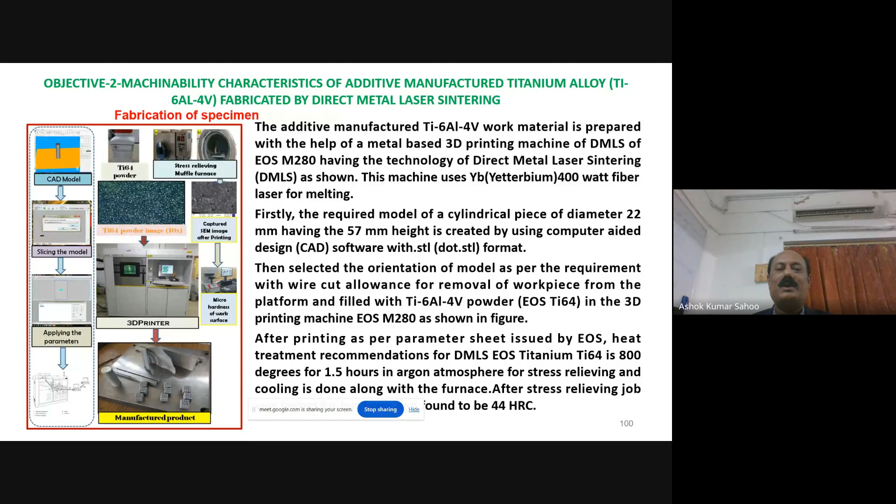During additive manufacturing, titanium 64 powder is used, and the 3D printing process is carried out. Then jobs are produced, then heat treatment is carried out to relieve the stress, and finally the components are produced. So this is the experiment.

Carried out in DMLS, direct metal laser sintering process, for the fabrication of additive manufactured components by the DMLS method. It is processed through layer by layer deposition to get the components by direct metal laser sintering process.

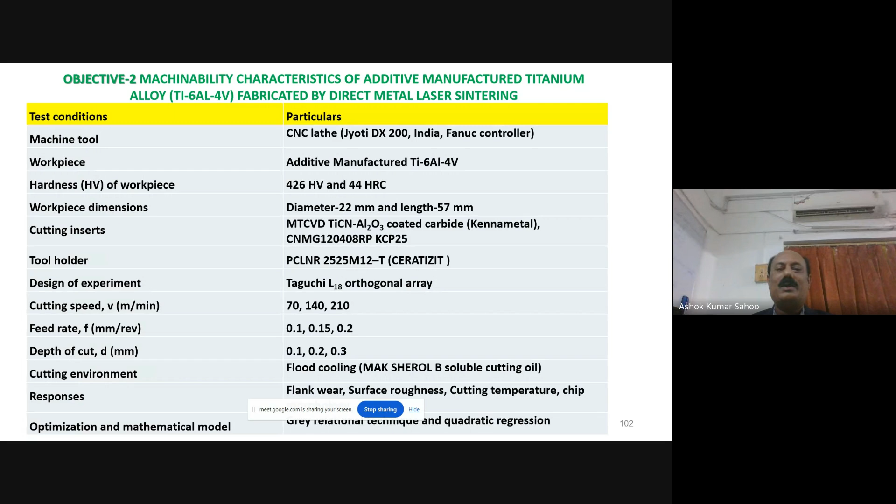Then machinability has also been carried out with 3 process parameters at 3 levels using Taguchi design of experiments. We have taken the L18 orthogonal array design of experiments under flood cooling operations, and we compare the machinability characteristics in 3 machining environments: dry machining, flood machining, and MQL machining.

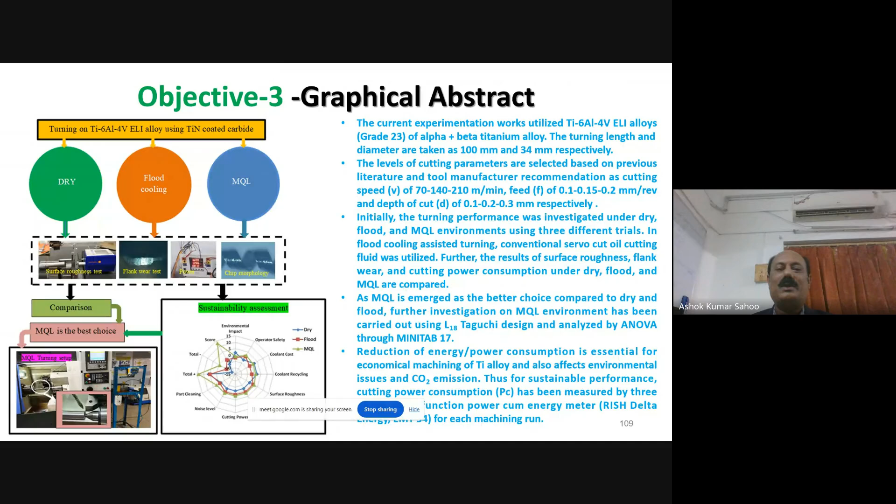This is the MQL setup. This is the measurement setup. This is the experimental methodology for sustainable machining under the 3 cooling and lubrication environments for the machining of titanium alloy.

These are the experimental results and findings for objective 1, for wrought alloy, where flank wear lies between 0.033 mm to 0.16 mm, where the acceptable limit of flank wear is 0.2 mm, taken for finishing machining operation as per ISO standards. Surface quality acceptance limit is taken as 1.6 micron, comparable to the surface grinding operation as per ISO standard.

It is obtained that a lot of adhesion, built-up edge formation, chipping, and abrasion are clearly observed in the EDS analysis of the raw titanium alloy.

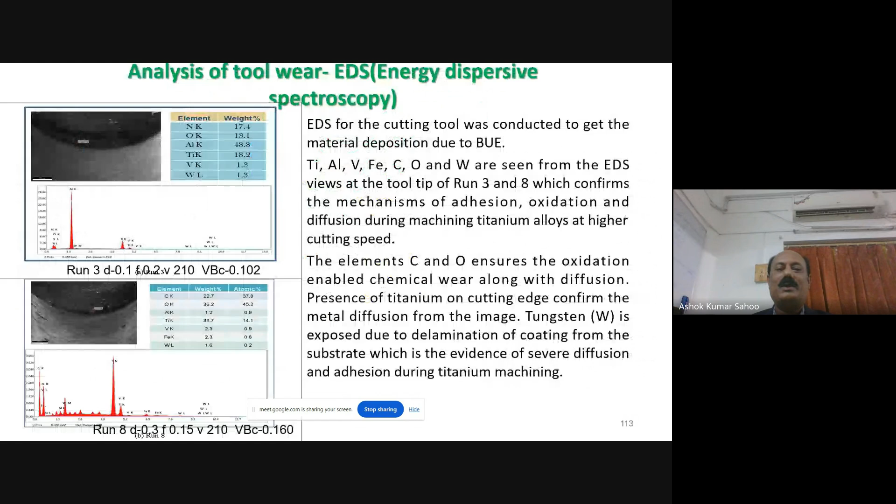Cutting speed is found to be the most significant parameter for tool wear. Feed is significant for roughness, and cutting speed is significant for cutting temperature. As per the main effect plot and ANOVA analysis, depth of cut and cutting speed are found to be the most significant parameters for tool wear progression, as the p-value is less than 0.05 at 95% confidence level.

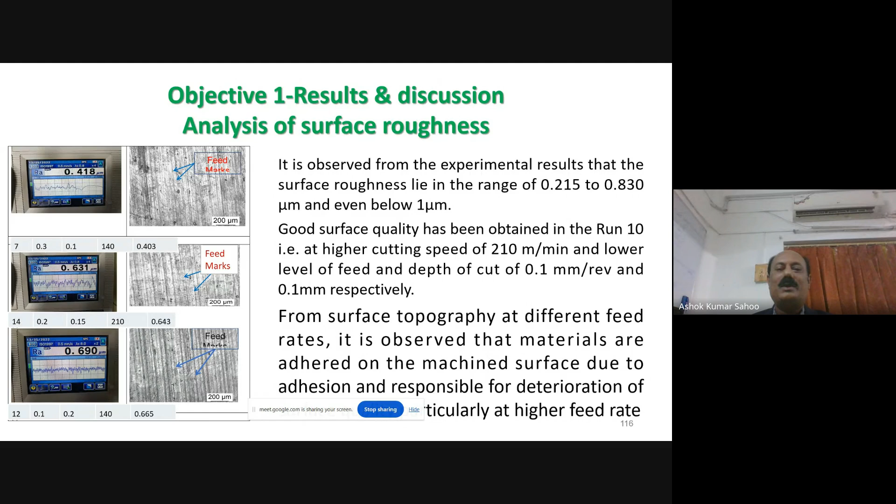Surface quality is obtained, and feed marks are clearly observed on the surfaces through metallurgical microscope, also measured through the Taylor-Hobson surface roughness tester, where it ranges between 0.215 to 0.83 micron average surface roughness, which is well within the 1.6 micron standard taken as per ISO standard. Feed is found to be the significant parameter for surface quality in ANOVA analysis.

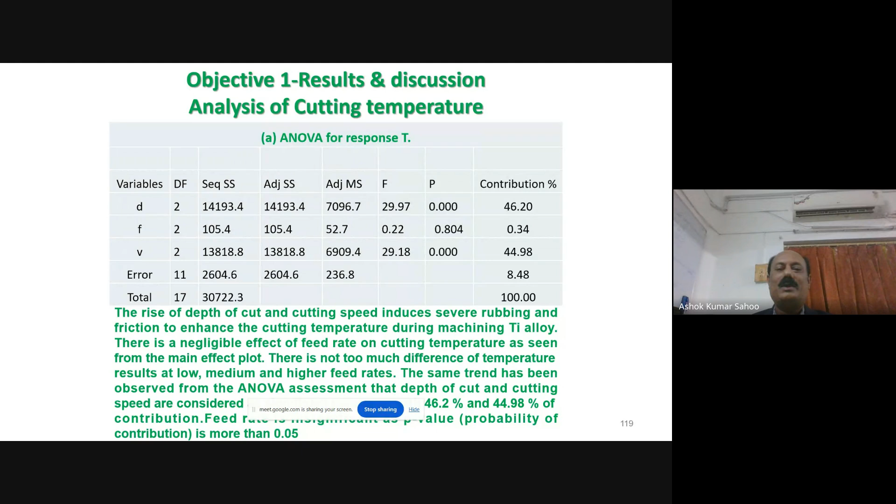For cutting temperature generation during machining of titanium alloy, measured through IR camera, it ranges within 31 degrees C to 150 degrees C. The maximum is 150 degrees C, where the flank wear is maximum. Depth of cut and cutting speed are found to be the most influencing parameters for cutting temperature generation during machining of titanium alloy, as p-value is less than 0.05 and contribution is maximum.

Sawtooth chips are obtained. Optimize the process parameter: cutting speed at level 1, depth of cut at level 1, and feed at level 1 induce the optimal machining process parameter for machining of raw titanium alloy.

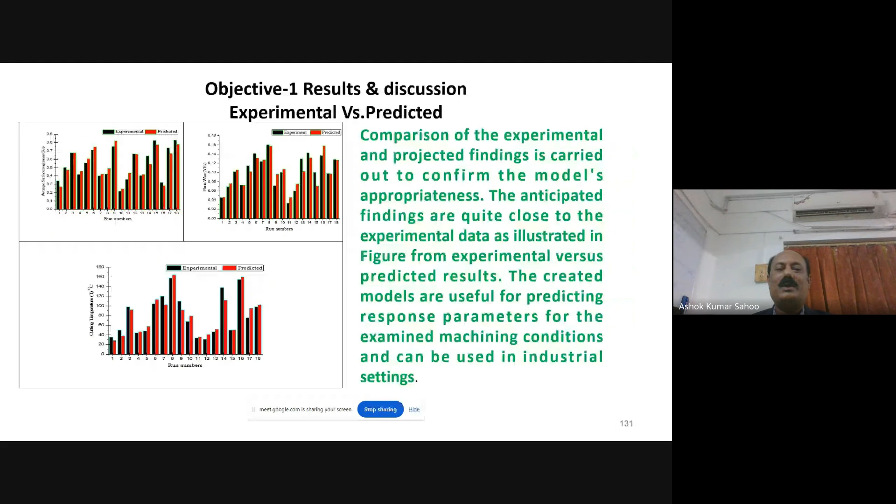Mathematical models are developed through quadratic regression analysis and found to be significant. Roughness model, temperature model, and flank wear model are developed and validated with respect to the normal probability plot, and found to be significant as the residuals lie over the straight line, showing the accuracy of the models. Comparison between experimental and predicted results are also carried out, and they are very close to each other.

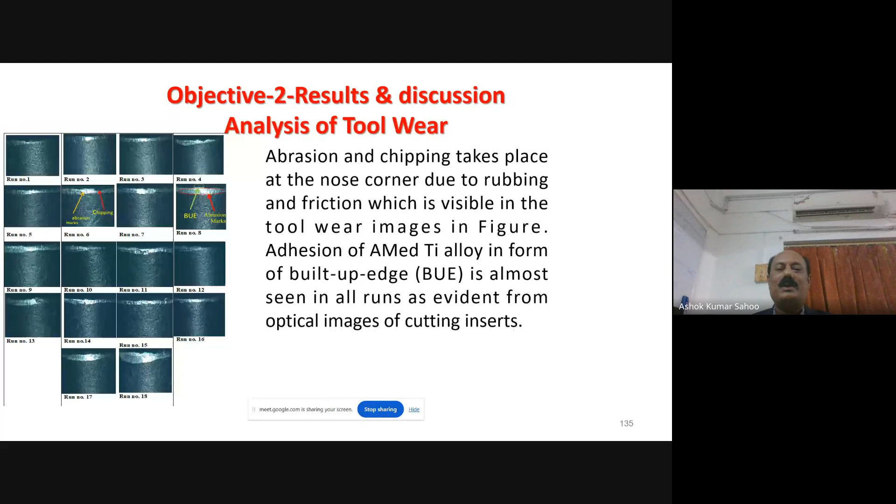We have also conducted machining for the additive manufactured titanium alloy and compared the results with raw titanium alloy, where we observed built-up edge formation in the optical microscopic image of the flank wear region of the cutting insert after machining, carried out under an L18 Taguchi orthogonal array for flood machining environment. Interestingly, built-up edge formation is seen in almost all the runs, as evident from the optical images.

Adhesion, abrasion marks, built-up edge, crater wear, flank wear, and chipping are quite often observed in machining of titanium alloy. These need to be controlled by application of proper cooling and lubrication environments, like minimum quantity lubrication or nanofluid MQL environment. So the challenges are here and need to be addressed and explored, so as to enable effective machining of titanium alloy under different machining environments.

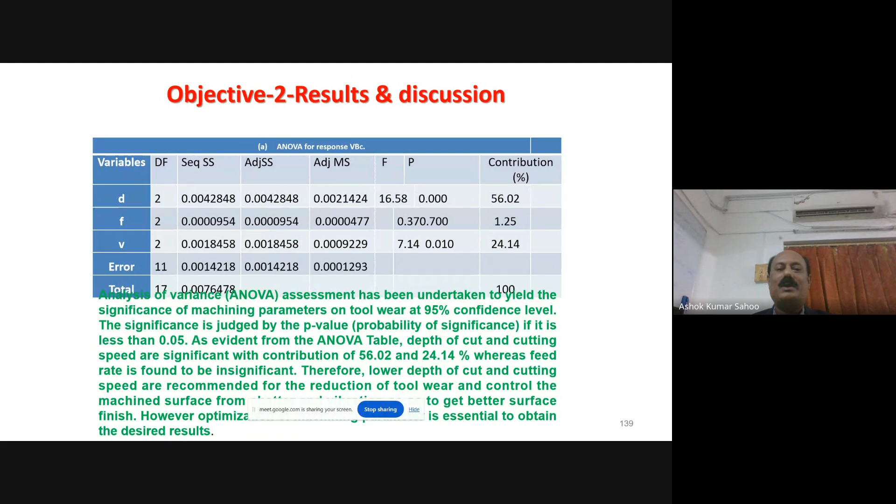Similarly, the parametric influences have been carried out for the additive manufactured titanium alloy. Depth of cut and cutting speed are the most influencing parameters. As per ANOVA, surface quality is very good. Cutting temperature generation is within 28 to 170 degrees Celsius, and sawtooth chips are obtained. The process parameter is optimized.

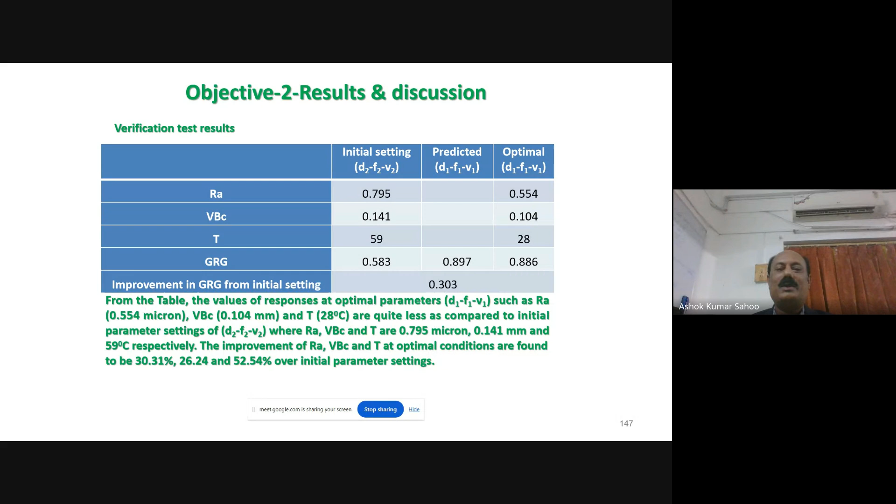Similarly, cutting speed at level 1, feed at level 1, and depth of cut at level 1 are the optimal process parameters through grey relational analysis. Mathematical models are obtained, and the correlation coefficient and R-square value are very close to 1, almost 95%, showing the accuracy of the model. The regression models are also significant because the p-value is less than 0.05.

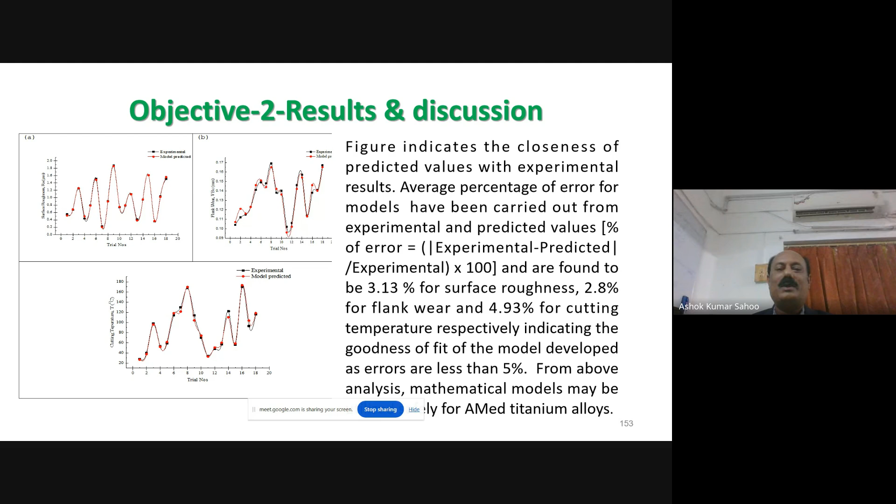Normal probability plots and comparisons between experimental and predicted values are also very close to each other, with errors found to be less than 5%. So the mathematical models are found to be good for additive manufactured titanium alloy.

A comparative performance was also carried out under dry, flood, and MQL environments at a particular machining condition: depth of cut of 0.77, feed of 0.1 mm per revolution, and cutting speed of 70 meters per minute. At this cutting speed, we observed less roughness, less flank wear, and less power consumption under MQL environment as compared to dry and flood during machining of titanium alloy.

Similarly, at 140 meters per minute and the higher cutting speed condition of 210 meters per minute with multi-layer coated carbide insert, the flank wear evolution is 0.212 mm, well within the 0.3 mm limit for finishing operation, and the RA value is 0.94 micron, well within the 1.6 micron limit, under MQL environment.

We observe that under dry and flood environments, particularly at higher parametric conditions, the flank wear limit VBC is 0.484 for dry and 0.416 for flood, which crosses the acceptable limit of flank wear as per ISO standard. So under dry and flood machining environments, titanium alloy machining is not suitable at the cutting speed of 210 meters per minute.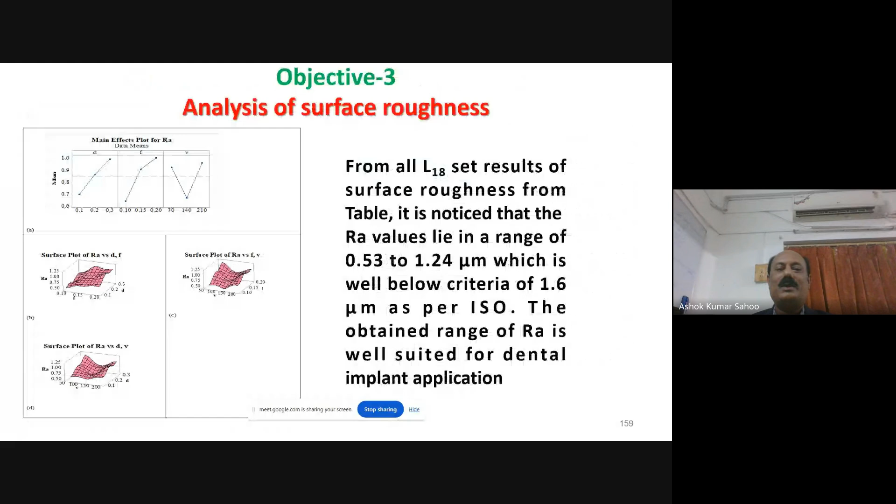So tool wear progressions and optical images are clearly observed, with a lot of abrasion and built-up edges seen. For surface roughness, depth of cut, cutting speed, and feed are significant as per ANOVA, with feed found to be the most significant parameter.

For flank wear, cutting speed is found to be the most significant parameter, and for cutting power as well, cutting speed is found to be the most significant parameter.

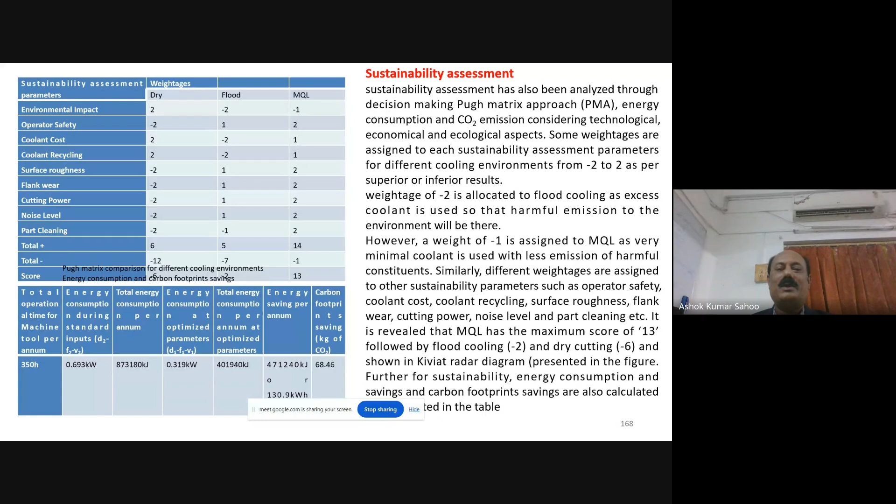Models are developed, and the sustainability analysis has also been carried out under 3 machining environments, where the sustainability score as per the Pugh matrix approach is higher under MQL environment as compared to dry and flood. So these are some comparative graphs.

In conclusion, the sustainability Pugh matrix assessment approach reveals that MQL environment enhances the economical, technological, environmental, and operator health aspects. Reduction of energy consumption by 53.96% and savings of carbon footprint by 68.46 kg of carbon dioxide emission were observed under MQL at optimal condition.

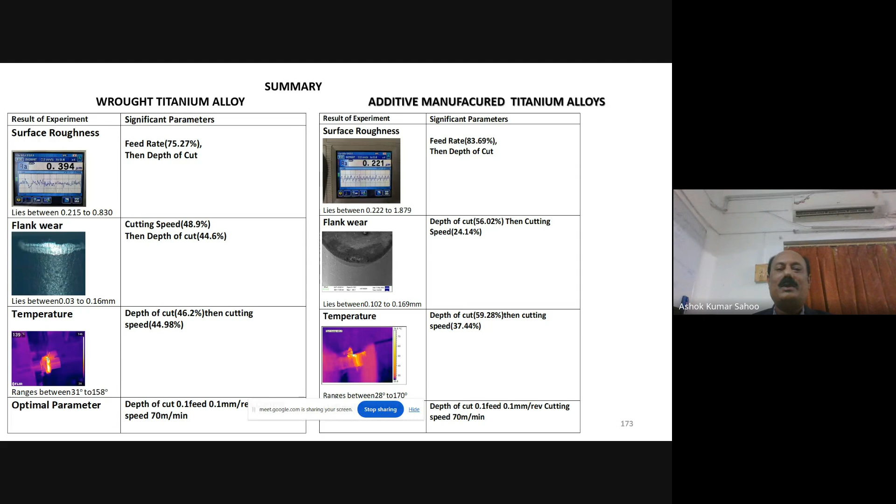Thus it saves manufacturing cost and carbon dioxide emission, satisfying green manufacturing and cleaner machining operation. These are some comparative results between wrought titanium alloy and additive manufactured titanium alloy, where the work has been published in various journals in IMechE Part C and Part E, on machining of novel additive manufactured titanium alloy developed through direct metal laser sintering process. The findings are reflected in these two journal articles.

In our last case study, we focus on vibration aspects and tool condition monitoring, considering vibration signal measurement to monitor tool wear and surface roughness during hard machining for smart machining. Vibration plays a very important role in deterioration of surface quality and growth of tool wear and tool life in hard machining, particularly where the radial thrust component force is higher compared to the tangential force. That's why some pilot tests were conducted initially.

This is the experimental setup where the accelerometer is mounted at the tool holder in both radial and tangential directions. The accelerometer in Y direction and Z direction is attached to the tool holder, and the signal is processed through storage oscilloscope and vibration analyzer connected with a PC, analyzed with software.

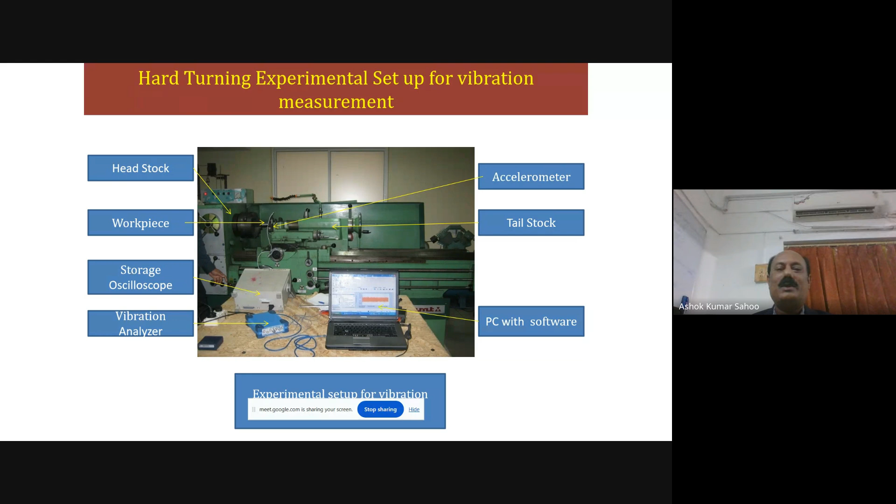We capture the acceleration amplitude of vibration through time and frequency domain directly through the vibration analyzer with the PC, for which the machining length was fixed at 100 mm at each and every run.

The acceleration amplitude of vibration has been measured through accelerometer, vibration and signal FFT analyzer in both radial and tangential cutting force direction. We measure the acceleration amplitude of vibration in radial direction, Vy, and tangential direction, Vz. Time and frequency domain waveform and spectrum obtained from the single channel vibration signal analyzer were processed through the software. These are the readings obtained for acceleration amplitude of vibration.

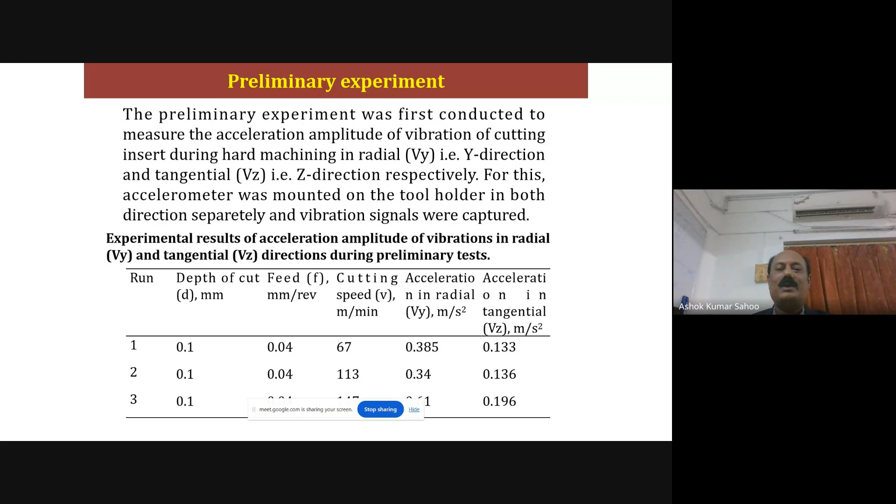As we observe, the acceleration amplitude of vibration is maximum in the radial direction. This is due to the higher thrust component force in hard machining condition, as compared to the tangential direction. That's why in further hard machining operations, we consider only the acceleration amplitude of vibration in the radial direction.

By conducting the experiment using Taguchi L18 orthogonal array, considering three important process parameters: cutting speed, feed, and depth of cut. The output responses are the amplitude of vibration, flank wear, and surface roughness.

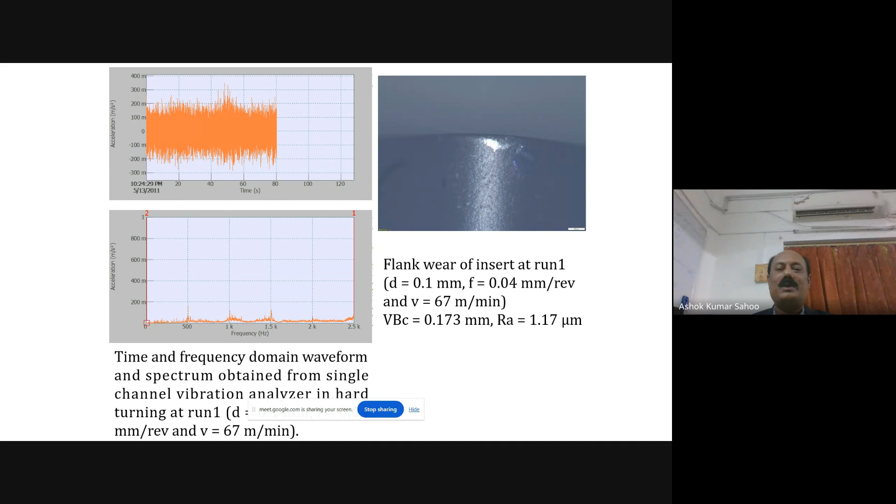These are the excerpts, showing the time acceleration amplitude of vibration in both time and frequency waveform observed during the machining operation at run number 1. At this time, the cutting tool wear is very minimal because it is operated at lower cutting speed and feed rate condition, so the waveform amplitude of vibration is quite less.

Similarly, it increases as the wear progresses. When operated at a higher cutting speed of 147 meter per minute, the amplitude of vibration in both time and frequency domain is higher, as clearly observed in both waveforms.

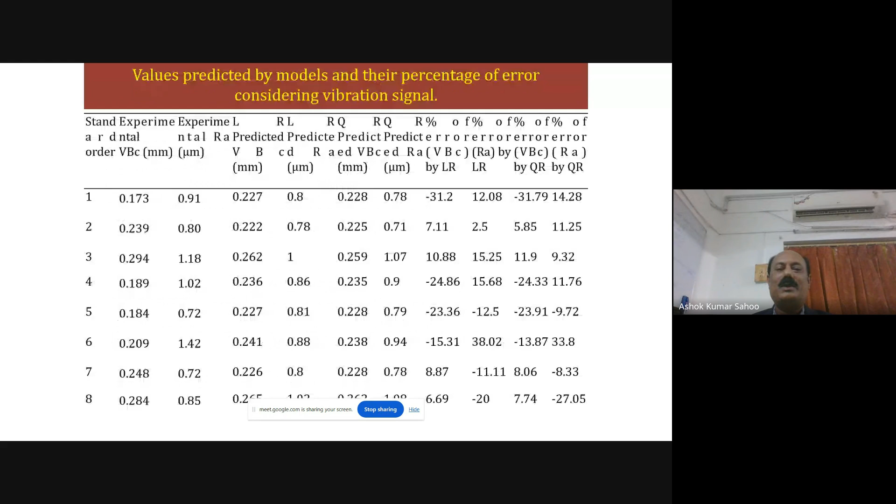We developed models: first the linear regression model and also the quadratic regression model. We first observed the linear regression model considering only vibration signal, which was found to be insignificant because the R square value is very low and the errors are larger. Then we developed another regression model considering the machining parameters and vibration signals together, all four taken together to develop the regression model.

However, before developing the regression model, it is essential to know the significance of the correlation of input parameters like depth of cut, feed, speed, and vibration on the output. For that reason, we analyzed the Pearson correlation coefficient of input parameters on output parameters such as flank wear.

It is obtained that for flank wear VBC, Pearson correlation coefficients are all positive and higher in value. Feed is higher, next is acceleration amplitude of vibration, then depth of cut, and cutting speed — all four are significant because they show positive values.

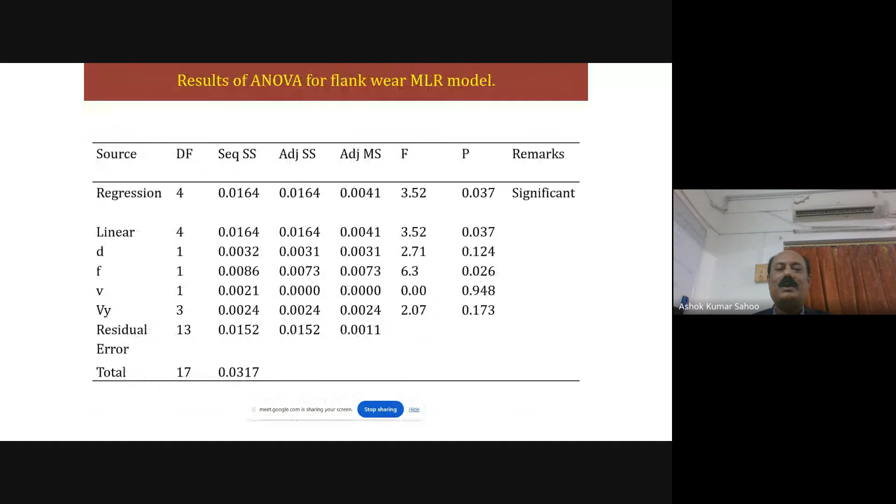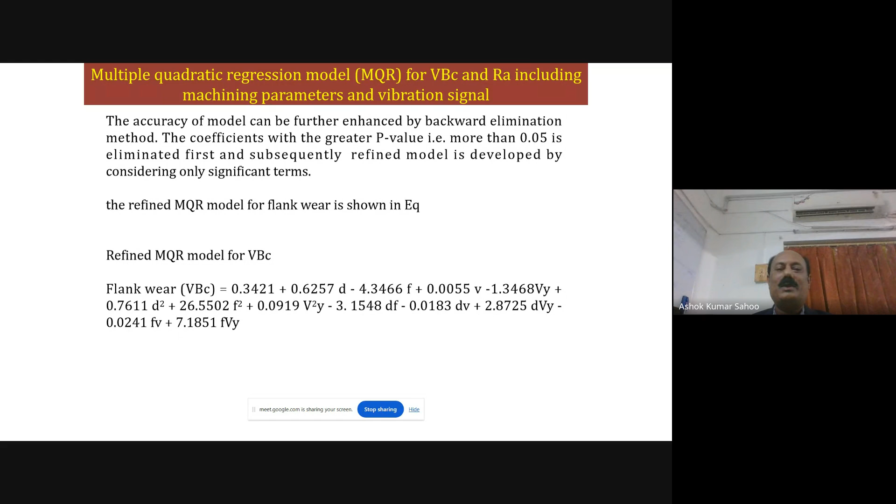Experimental value and predicted value are compared, and the percentage of error for flank wear is calculated. It is less than 1%, and the percentage error for surface quality is less than 1.2%, that is 1.22% only, for the multiple quadratic regression model, MQR model, which is found to be very good.

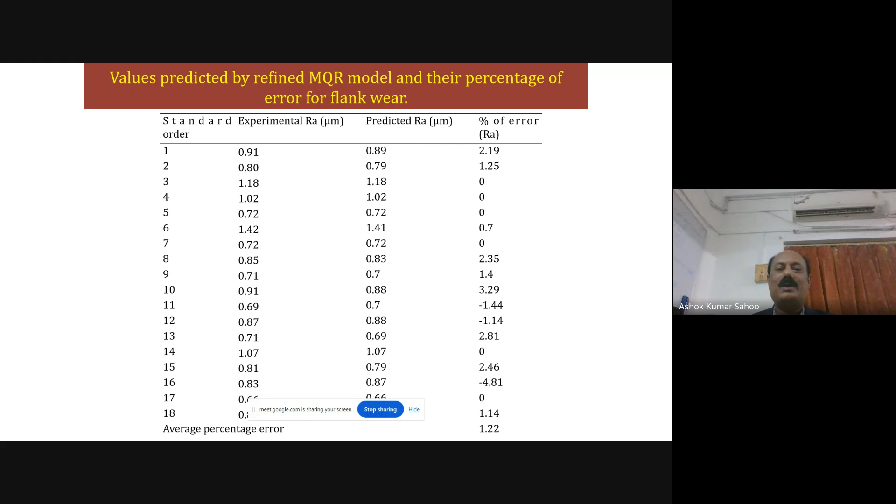These models are validated with different combinations of the parameters of cutting speed and depth of cut, which were not chosen in the Taguchi design of experiment. Again, 3-4 experiments are conducted by taking arbitrary parameters of cutting speed and depth of cut.

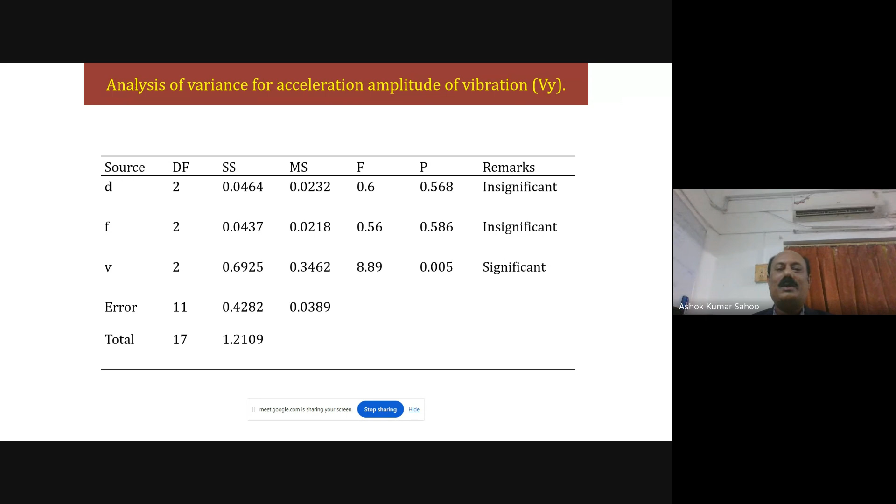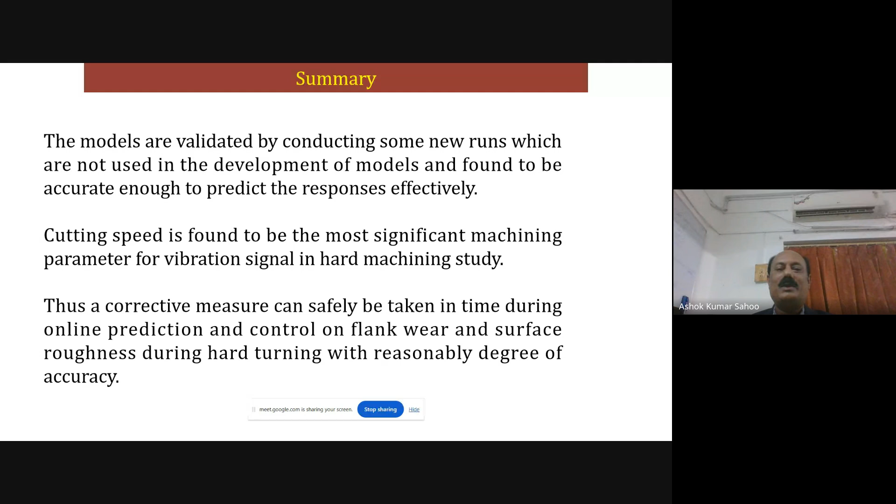The MQR model predicts well for the responses for both flank wear and surface roughness, considering the combined effect of machining parameters and vibration signals online in hard turning on the dry mode. So the models are validated, cutting speed found to be significant. Thus, a corrective measure can safely be taken in time during online prediction and control on the flank wear and surface roughness during hard machining operation with a reasonable degree of accuracy.